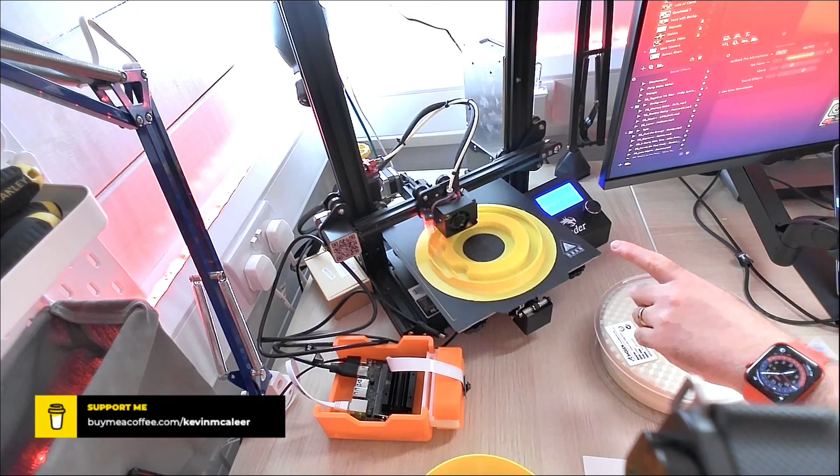I've actually started printing that one first, and I've bought myself a second 3D printer. It's another Ender Pro, this is version 2 of the Ender 3 Pro. So the one I have to my left here - this one is the original Ender 3 Pro, and that's printing out my Pac-Man as we speak. And the one over here, this one is the new one. I'm in the middle of constructing it.

Okay, so what else is there to say? Yeah, so we want to make it easily 3D printable. This is one of the reasons why I've sliced this into 4 different chunks. I just wanted to make this a bit more easy to print, otherwise it would take practically a week to build and probably be solid full of build material. So this is kind of what I'm shooting for here. So yes, game board, amazing.

So I'm thinking about having a printable maze layout that you can put on the floor and have the robots follow a line within that path. So I'm thinking that we'll have a black solid line that they can sort of trace along. I've got a couple of line following modules here. Let me see if I can find the one from the original SMARS. I think that is just that.

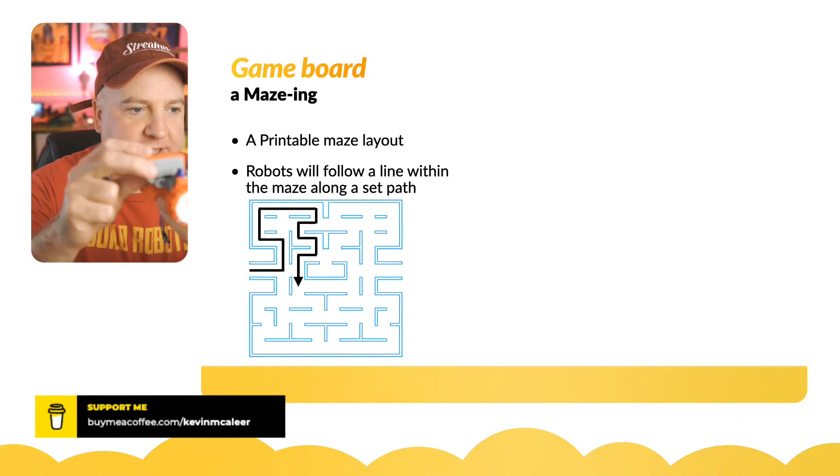So I've got a SMARS robot here which has the original line follow module on it, which is just hidden inside this little compartment here. So if I just slide this out, you can see there. Let's go full screen for a second. That is the original SMARS module for line following. I've got a slightly different, slightly smaller module which does the exact same thing, and this is the one I've used on the ghost model we're going to look at in a second, just because I had that to hand.

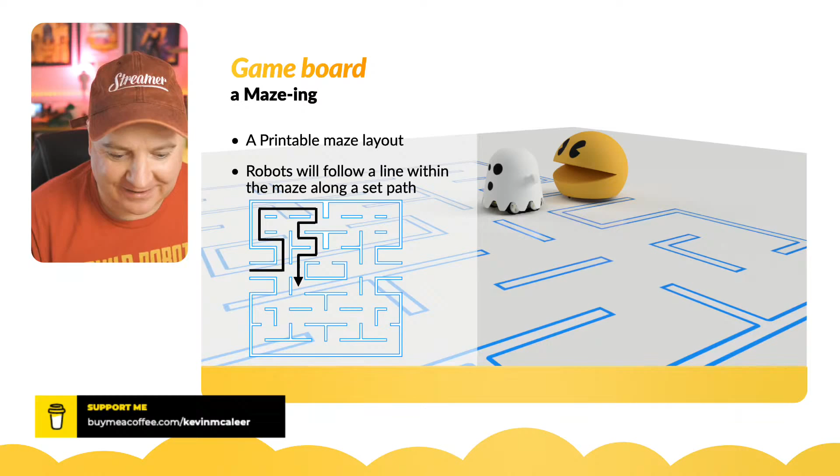Okay, and yes, what we're going for is that kind of scene where we've got the Pac-Man chasing the ghost. They're going to be following a black line along a path and it'll be inside a maze, and we'll look at the code in a different episode.

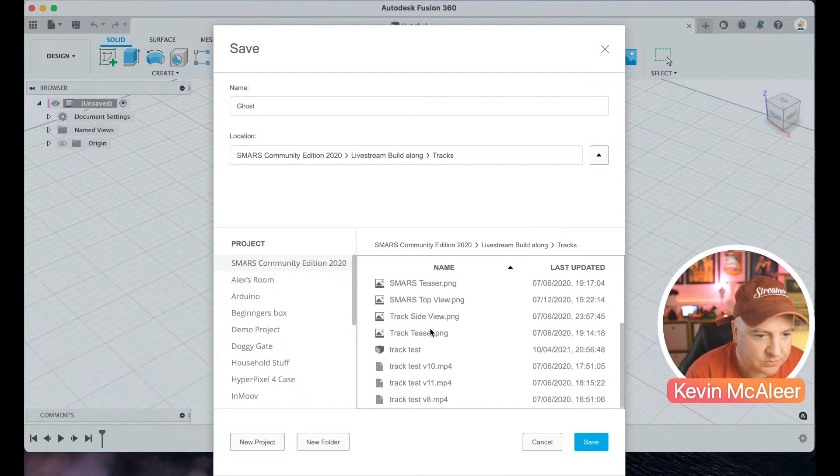Right, so I've got Fusion 360 open there, and the first thing that we need to do is save the file. So let's just go to Save. Let's call this one Ghost. And let me just back up a little bit. I'm going to go, yeah, live stream build along is good. Do I need to use that button there? I just want to save it in a different folder. So there we go. That'll do fine. Call it Ghost. Okay.

And what we're going to do now, I talked about having the Fusion 360 file for SMARS, that means that we can go into our data panel, which is this, when you press that little nine squares thing there, and we can do right click and insert into current design. So I'm going to insert the SMARS robot into our current design, and I'm going to use that to build our ghost around. As soon as I've done that, wait for it to plop there, we can close the data panel now. Okay, and I'm just going to save it again.

Okay. You might see it jump in and out a little bit. I think that's just the software I'm using to do screen capture. It tries to capture everything, and sometimes it zooms in and out a little bit, which is a little bit irritating, but there we go.

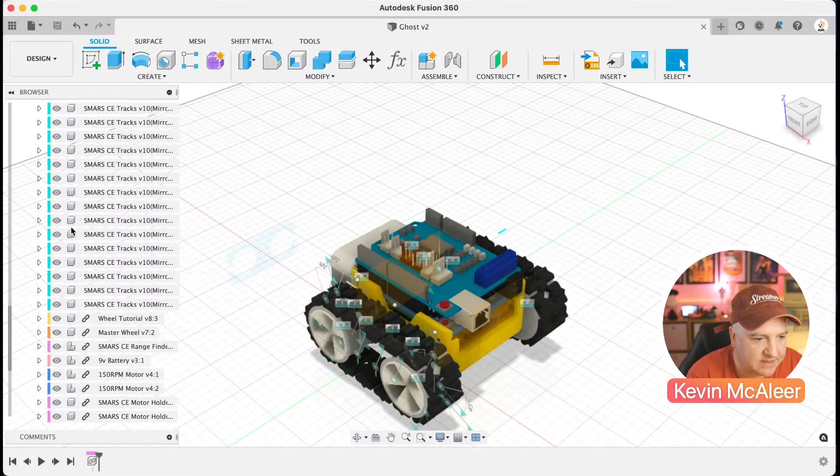So we can now see we've got SMARS track test. What I'm going to do in there as well is switch off the rangefinder, because we're not going to be using that in this particular model, and I want to make sure that we don't accidentally include that. So I think there is rangefinder. If I just switch that off, there we go. And we can spin that around and have a little look. There's our SMARS robot.

Okay, so the first thing we want to do then is create a new sketch. So let's go to create a new sketch, and we want to create it on the top plane. So let's go to... Now I've noticed this. I was wondering if this would happen. It might happen several times while I'm using Fusion. On a Mac, for some reason, when I just move my mouse around, it's kind of got stuck into this pivot mode, which is really irritating, and I don't think you can do anything to switch it off. So what I found you have to do is simply close the file and then reopen it. If I just close that and reopen it, everything should be fine.

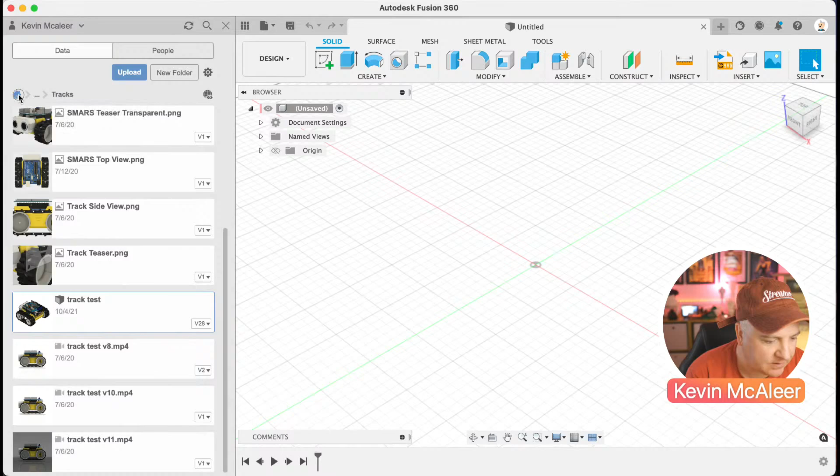So let's just go back to recent data and Ghost. There we go. Might have to do that a few times. It's a bit irritating. I believe it's a known bug in Fusion. I don't know why they haven't prioritized that as a fix, but it's a bit annoying that happens. Okay, so let's just close that out again. So this time we're going to create that new sketch. We're going to create it on the top plane, looking from above, and then I'm just going to click there. Here we go.

Okay, so I want it to be centered in the middle of this SMARS robot. So what I'll need to do is just find, is there a central point there? And if there isn't, we can just project in. So if I do P for project and just grab a couple of these lines, we can figure out where the middle is. So let's just do that. I didn't build this around the origin, which is a bit annoying.

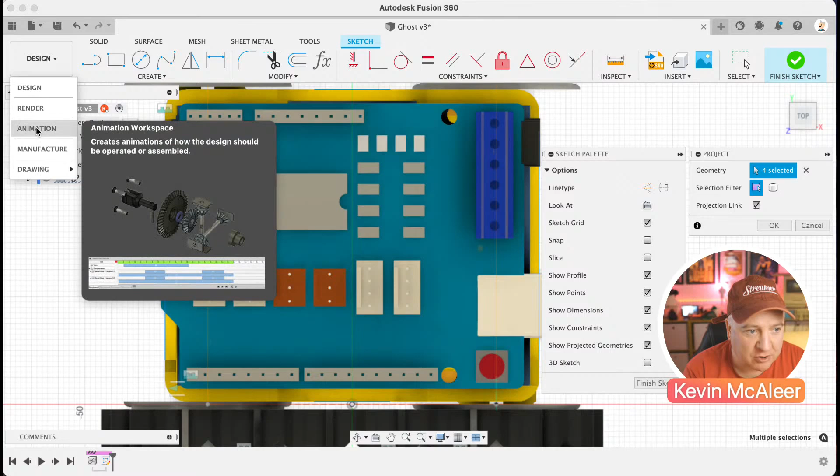So Hypotics is asking, am I using the full or limited version of Fusion 360? So I do have the full paid version. So thanks to people supporting the show, I was able to get a full licensed copy of this. And that just means when I go to the design, I've got all the render options, all the manufacture and animation and so on, and drawings and whatnot. It's not that limited if you get the hobbyist version. I think you just can't do cloud-based rendering.

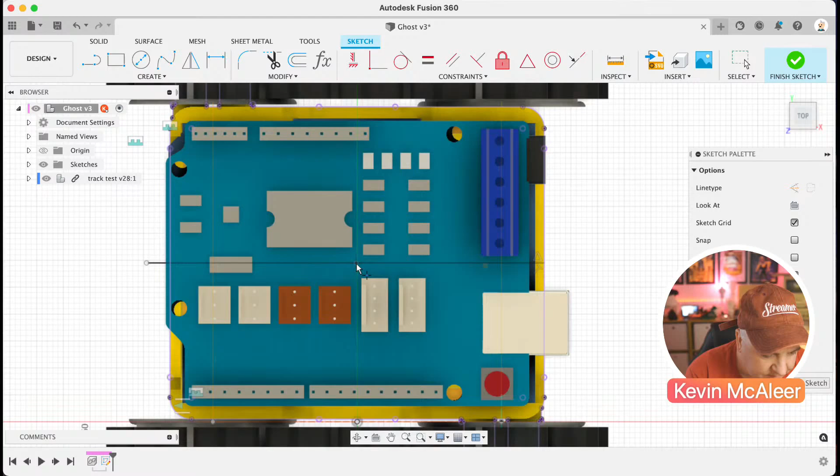So that's all. Right, so I've got some projected in geometry there. Is that going to be enough? Maybe I'll just project in the body. That might be just easier. Just project in that thing there. Okay. And what I want to do is just find the center point. So if I just grab a line down here, grab that across, that'll do. And that little point in the middle there, that's what I'm going for. Let's just create a point there and put it there. That'll do.

Right. So I'm going to use that center point there. I'm going to click in it and draw C for circle. And when I drag out, we can see that we've got a circle now. And the idea is that this is just surrounding all of our robot, so that, like on the one I've built here, there is nothing touching the edges. And what I found is the diameter that's ideal for that. If I just click there and do D for diameter, and just give this a diameter of 145, that's pretty good. We're not making it absolutely massive, but we've got a bit of clearance around the tracks.

Yeah, Dale also says you get 10 documents with a limited version. I think there's also a limit on how many sub-assemblies you can have in one model. I didn't know about the sub-assemblies. That must be a new limitation. They did make it so that you had 10 active documents, and you had to go into the data panel and say which of the 10 you're currently using. It's a little bit limited, but it's free, so it's as good as it's going to get for free, I think.

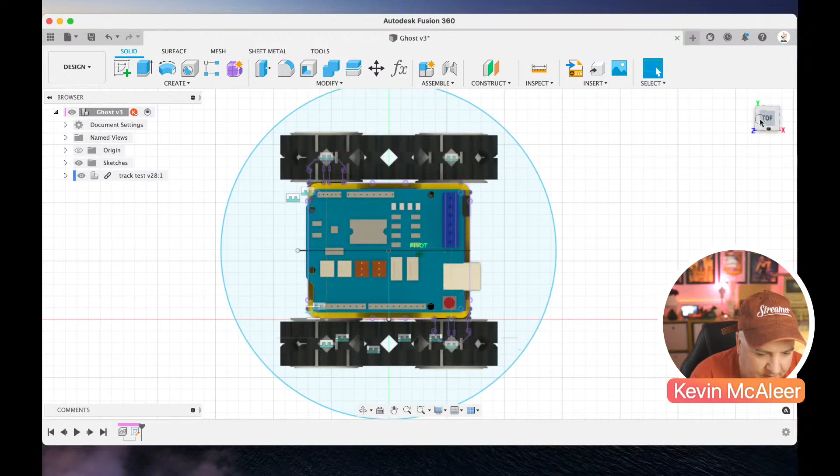Okay, so now we've got that locked in there. I'm also just going to, from the origin point, do a line up there, and then whatever dimension it is. That's going to get irritating, that flickering. Let me just see if I can switch that to a different mode. I've currently got it set to zoom to the app window. If I do that, it'll stop the flickering, because I think that's going to get really irritating. Right, that's better. So if I now do D again, dimension, just dimension out that line. There we go. That should lock that in place. Finish that sketch.

And now we're going to extrude up that shape. So I'm just going to hit Q to extrude. And we're going to extrude this up as a cylinder by 130. I'm just going to zoom out a little bit so you can see that, just to make sure we've got everything included. We want to make sure it's a solid. So it needs to be 130. Why is it not included? All of the profile. There we go. What we can do is switch off that for a second and make sure we've got all the bits of profile selected. So yeah, 130.

And then the other thing we want to do, where you've got this taper angle, let me just bring this out so you can see it, taper angle, we're going to set that to -10. So it'll look like a plant pot shape. That's kind of what we're going for. Okay, so what we're going to do next is fillet that top edge. So this top edge here, if I just select that and use the fillet command, which is this round thing here, we're going to fillet it by 50, and that gives us a nice kind of rounded effect.

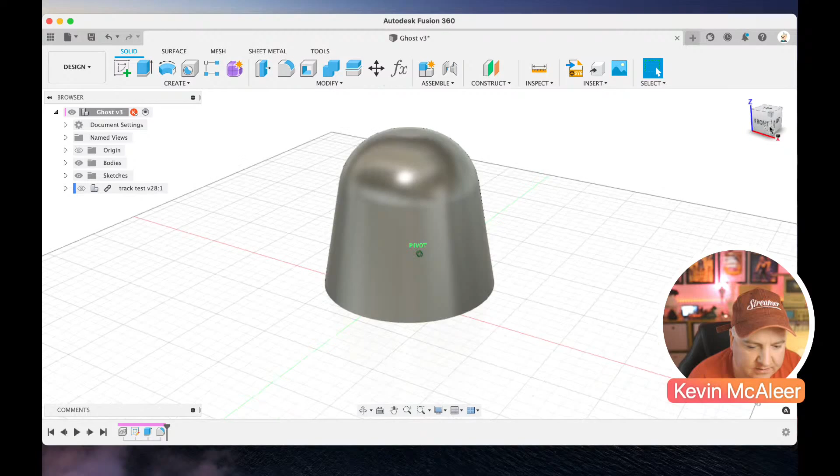And then we're going to flip this over now just by grabbing this and moving that up there so we can see underneath. And I'm now going to use the shell command, which is this one here. And what shell does is it kind of makes it, let's just do 1.5, kind of opens it out so that it's empty inside, so now it really does look like a plant pot. So I've done 1.5 millimeters, that seems to be okay.

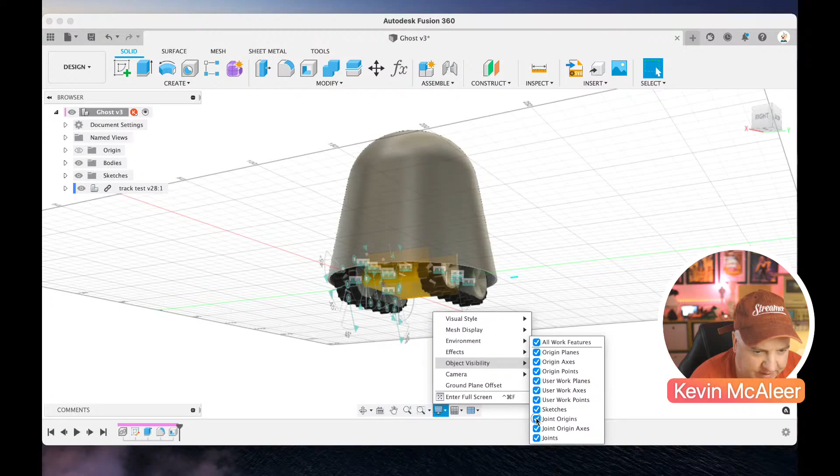And that means now if I switch that track test back on our SMARS robot, we should be able to see that's now sort of sat within it. So there we go. What I also like to do on here when I'm working, I don't always need to see all of the object visibility, so those joint origins, I'm going to switch them off, and that just gets rid of a bit of the visual noise that's on that particular model there. Okay, we can switch off the track test again now, just for speed.

Okay, so that's that. Next we are going to, on the very bottom plane, let's go back to our first sketch again. And what we're going to do this time is we're going to draw a rectangle round that. So let's just draw a big rectangle. So I hit R for rectangle, and then what I'm going to do is I'm going to use the tangent command to connect that line to the circle, so that this encompasses the entire circle. Alright, I need to fix that up in a second.

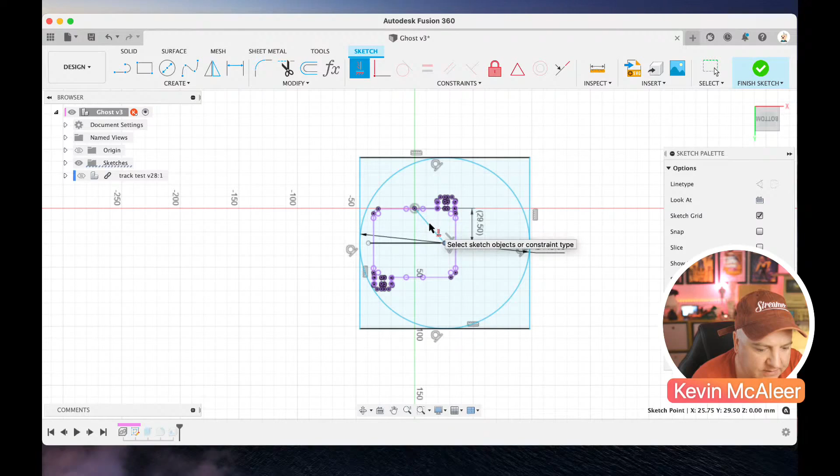And that to there. So I noticed that that circle moved about a bit then, and that's because this line that we've got here needs to be sort of locked into place. So what you can use is this horizontal vertical constraint. So if I click on that and just click on that line, that should lock that into place. Let's just make sure we've got that selected and hit that here. There we go, it's all turned black, that means it's now locked into place. And let's just switch on our track.

Yep, that's all good. So the reason I'm doing this rectangular shape is I want to create some planes that we can use to draw other things. So before we do that, let's just switch on our sketch that we've just created, sketch number 1, and we're going to pull by pressing Q, select those 4 bits, and we're just going to extrude this up. Doesn't really matter how high, to be honest. And it doesn't matter that we've missed out a middle bit, so that's okay. What we really want is these nice flat surfaces.

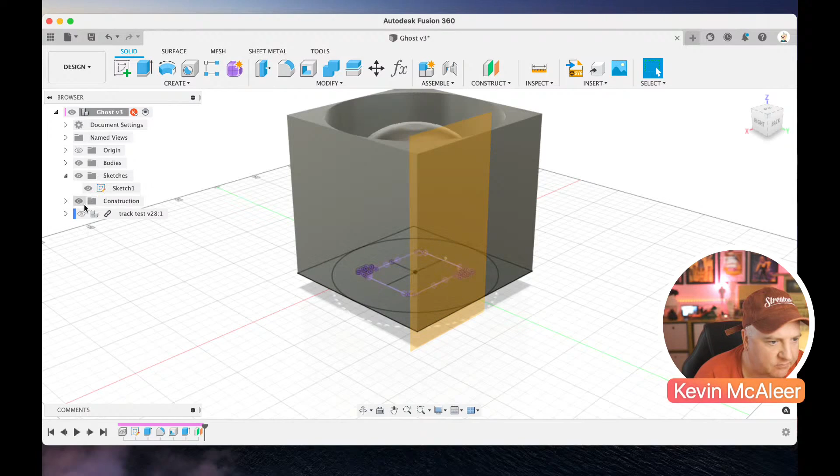Okay, so let me have a look what's next. So yes, what we want to do is we want to now create an offset plane, and we want to use this side here to create the first offset plane. And this is going to be our right side, is it? No, that's the back, isn't it? Let's see which way around our robot's facing. So what I do is I look to see where the USB connector is on the robot. So let's just switch off those bodies for a second. So this is the right hand side of the robot.

So what I'm going to do in the body section is I'm going to name the construction plane there, just so that I know what I'm working with. So let's just click on that and call it right. And then on the opposite side of that, I'm going to create another offset plane. So on this side, I'm going to create another one. So construct offset plane. Okay. That's going to be my left plane.

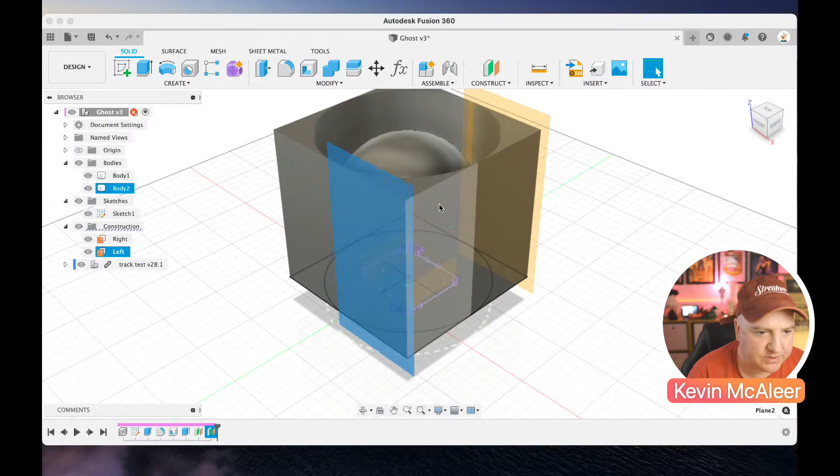And what we're also going to do is the front and the back. So I'm going to click on that one there. That is, if I remember correctly, that is the back. So let's do offset plane. Okay. I'm going to name that one back. Back. And then we're going to, oops. I mean, it doesn't really matter, I've spelled that wrong. And then we're just going to flip that round to the other side. And we're going to create one on here and just call that front. Offset plane and front.

Okay. Great. Now what we want to do is create some mid-planes. This is really what I've created those for. So between the right and the left, I want to create a new plane. So what we do is we create a mid-plane by going to Construct and Mid-Plane. And then we select the two planes that we're interested in.

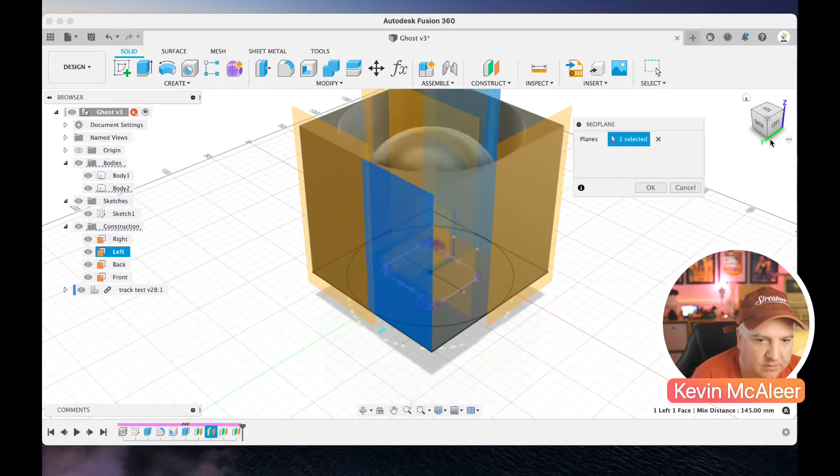So if we just select the left and the right, let's just make sure we've got that correct. You can see now there is a new plane that's just been created just here in the middle. So let's click OK to that. And I'm going to call that one the center plane. I'm going to switch off all those other ones, the left and the right for now.

And then I'm going to do the same again between the front and the back. Okay, so let's just go to Construct, another mid plane, and we're just going to select the back and the front. Okay. And that gives us our, does that look right? Looks like that's at an angle. Let me just try that one again, edit. I'll just unselect them. Let's do that again. I think I selected the wrong ones there. So front and back. There we go.

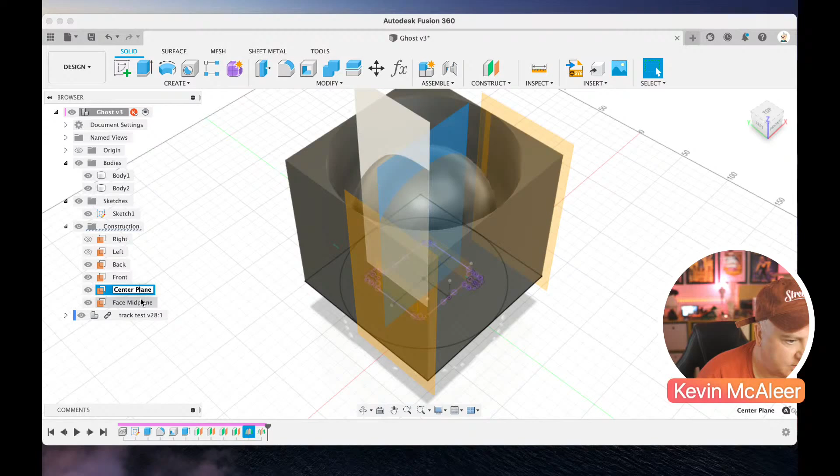That's the mid plane. So we're going to call this one the face plane. So let's just click in there. Call it face mid plane. Okay, we can switch off those other ones now. Right, so we've kind of got like a crosshair now right in the middle of our robot. We can unselect that body shape now. We don't need that anymore. And let's have a look what's next.

Right, so what we want to do now is we want to face our robot. So I think on this one, is it the left hand side is the front. Let's just hide our body for a second and see. Yep, that's the front of the robot. Okay. So Adam's asking, will these fit on top of SMARS? Yes, that's exactly what we're going for. We're going for this kind of design where it will slot into place over our SMARS.

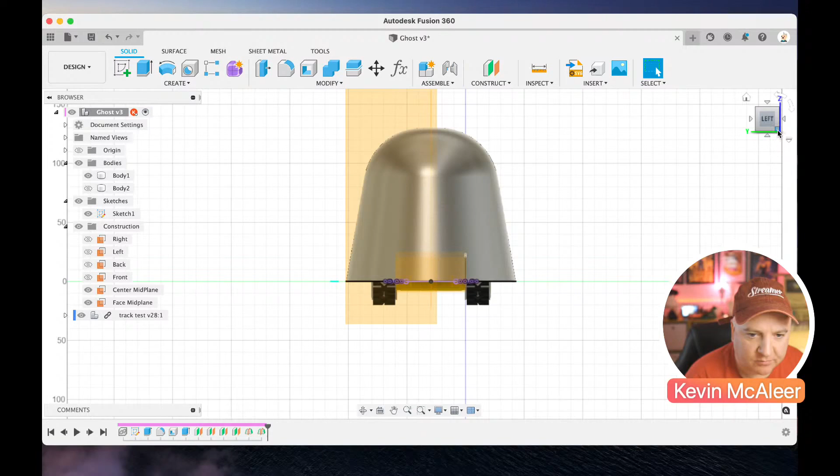So what we've done, if I just flip to the bottom of the robot, you can see there we've got our SMARS underneath, and this entirely surrounds the SMARS robot. Okay, so let's get back to, that's the back, so we want the front, which is, on this particular one, the left view. Okay. So I'm going to zoom in a little bit, and I'm going to create a new sketch on that face mid-plane. So that's as we're looking at it. So this is going to be the hand of the robot.

So let's just sketch out, let's just do it here. So I literally just do L for line, and I also use the slice command. So let me just move this little sketch palette here. You've got this slice command. What that will do is it will just let you work on the actual plane rather than working in the middle of it. You can't really see what you're doing. So if I do slice, it kind of slices the sectional view or what we're after.

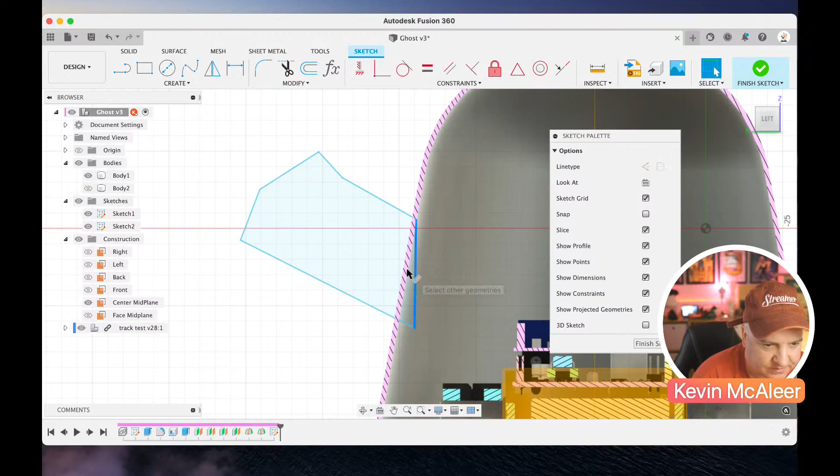Right, so I've got my line, and I'm just going to very quickly just sketch out from the side of the robot a kind of hand shape. So let's go for that. Let's go for, I don't know, that. And that. Okay. And what I can also do, if I really want to, I can make these things parallel with the body if I wanted to. It doesn't really matter because we can intersect it and then throw the bits away that we don't need, so it doesn't matter too much.

What I'm also going to do, just looking at my reference model there, I like to use this fillet command just to round out these corners. So I think all my corners are 10. So if I do that one there as 10, I'm going to do the next one. Let's move that up a bit there. Yeah, let's do that. Make that one 10. So select both of them, type in the number, and that's actually going to be underneath a little bit, like so.

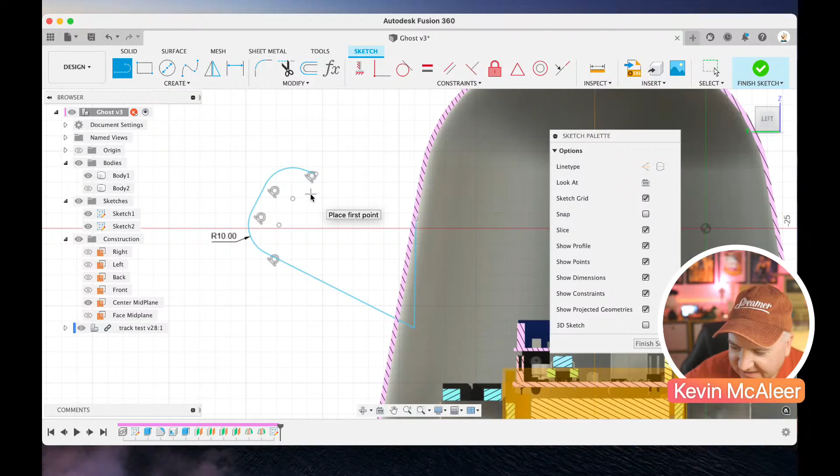That's gone a bit funky there, hasn't it? Let's just undo that. Yeah, that's weird. Let me just get rid of that line for a second and that line and redraw them in. Right, I can see what's happening there. It's got an extra line that we didn't need. Okay. I mean, it doesn't have to be like a massive work of art, this thing. It's literally just the hand shape. And I didn't draw this parametrically. I just kind of drew it freehand and then captured the coordinates of what I drew.

So I'm just going to do that and then line that up with there. So I think that fillet between that line there and there is something like 7. If I do D for dimension, I can just click on that, I think. Let's just zoom in a bit more. Do you know, I knew this would happen.

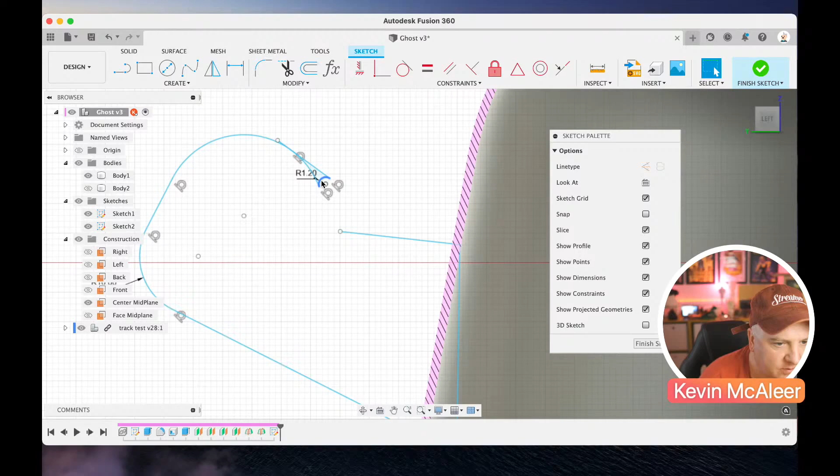Let's just go for space. Let's get rid of that. There's a weird thing going on just there that I don't want. Get rid of that, delete. Right, let's just try that again.

So I really just want that to go there. That'll do. So let's just do another fillet between that and make that 10. That's better. And then between that and there, let's just make that one 7.5.

So I've done that, and that'll do for now. Doesn't have to be amazing. Okay, we just need to make sure it's within the body itself like that, and that it looks proportionally about the right kind of size. Looks a bit big, that. Might bring that in a bit.

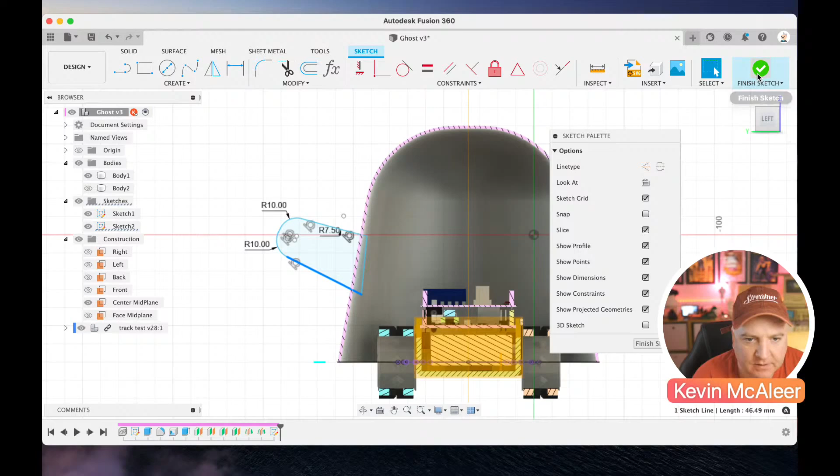Let's just move that up a bit. Move that in a bit there as well. That'll do, that'll do. Okay, let's not overthink this. So what I'm going to do now then, I'm just going to have a look at this in 3D space.

So let's just move that around there. And what I'm going to do, I'm going to extrude that by pressing Q, clicking on that, and I'm going to drag this out by 10 millimeters. I'm also going to set this to be 2 sides or symmetric, like so. That'll do. And we don't want it to be cut, we want this to be join. So let's do that, join.

We can turn off the other sketch as well, just so we can see what we're doing. We can also turn off those construction lines for now, and let's turn off the tracks as well. There we go. Right, so that's looking a bit blocky.

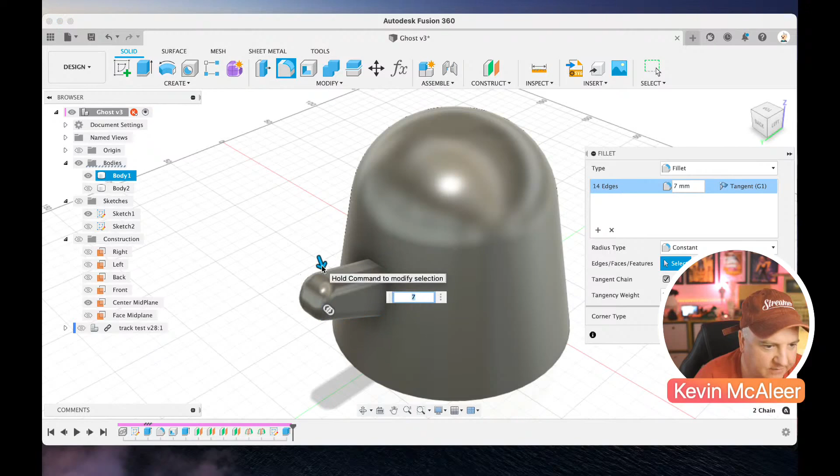So what we want to do is just give that a bit of a fillet. So again, we can just select that face. Let's just do the fillet command. Select that, do 7 millimeters. And if I also just hold down the command key, I can select the other one as well. And we get kind of a nice rounded arm shape there.

Like so. Okay, so we want 2 arms. Oh, before we do that, we actually just want to fillet the armpit as well, so where that's going in, it's looking like a teapot at the moment. We just hit that fillet command again and then just select that edge there. We can do that by 5 millimeters. It just gives it a bit more shape to it.

Okay, I also like to work when I'm working - that looks a bit reflective to me. If I hit the A key, I can bring up the appearance panel and I can search in this little library thing for white plastic. So white matte plastic, and just drag that onto there. There we go, I think that just looks a bit more visually appealing. Oops, where's it gone? There we go.

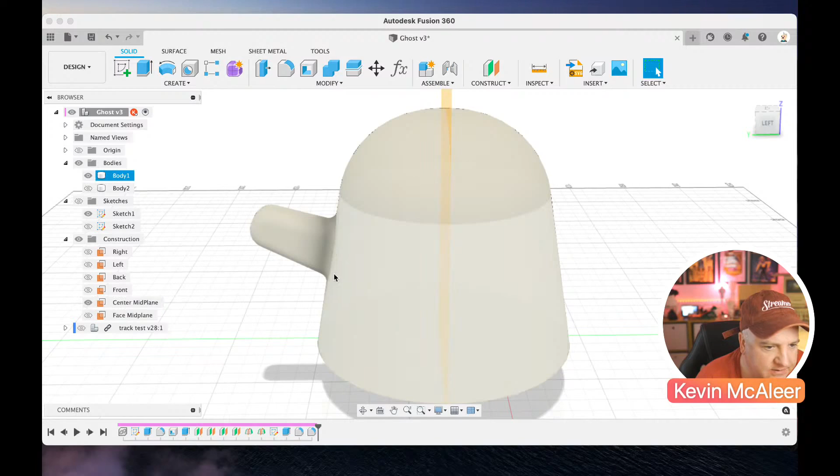Click close. Okay, so what we want to do now is mirror that hand across. So let's just turn on our construction lines again, and yes, it's that center line, center midplane that we're after. We're going to go to create and mirror, and then instead of it being faces, we're going to select features. And in our timeline down here, we can select the extrusion and both of those fillets, and then the mirror plane, we just move this around a little bit - is that center midplane that we created. And then okay, and there we go, we've got 2 arms now.

We can turn off that construction line to have a look at our ghost so far. Coming along, isn't it?

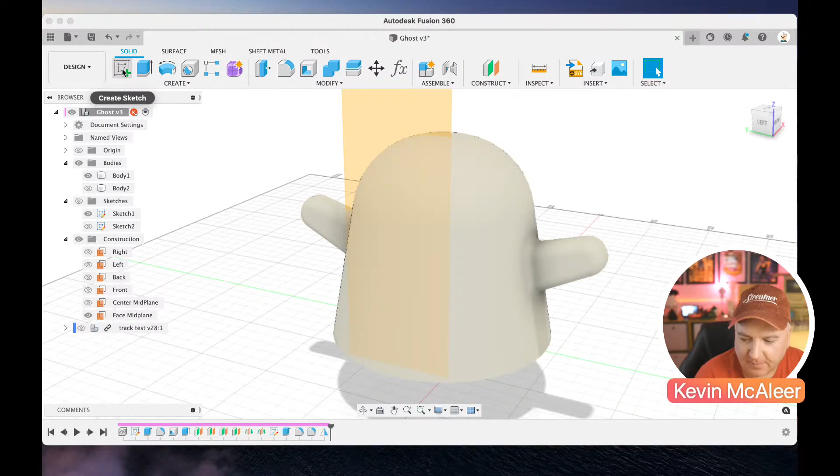So one of the fun bits is now to draw the face. So let's now turn on our face mid-plane, turn off that center one, and we're going to create a new sketch on here. Actually, let's not use the mid-plane, let's use the front plane. And let's create it on there.

So let's create... I'm just going to hit C for circle, and I'm just going to draw out two shapes. And I'm going to draw another one for the mouth. And I'm just going to draw a line between both of these, like so. Lock them into place. Press space to select.

Did I draw an extra line? I think I did. Space to select, then I'll hit the X key. You can actually just press this button to make it a construction line, which means when you're selecting the profile later on, it ignores this and only looks at solid lines.

So what I want to do is make that line horizontal, so click on that horizontal constraint. I want both of them to be the same, so I'll select one and make it 25 millimeters, and if I click on equals, I can click on that edge and make it exactly the same.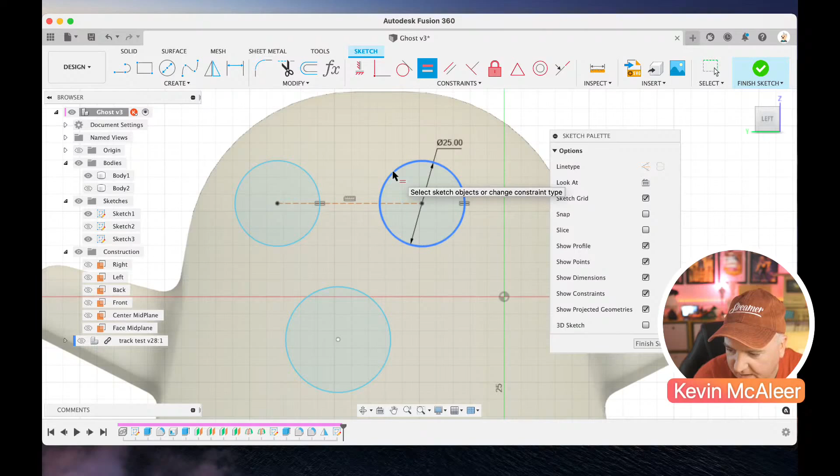And the distance between both of them is actually 25.5, so if I just make this 25.5, that doesn't quite look right. Why is that? Oh right, that's because it's not that one. Let me just undo that for a second.

I'm going to create two vertical lines. Doesn't matter where they are just yet, as long as they are vertical. I'll just double check by clicking on that. I'm going to make both of them X construction lines.

Now what I'm going to do with those two is make them tangent to that eye. So I'll click on that eye and that line. Oops, let's try that again. That is going to be tangent to that line, and that's going to be tangent to that line.

Then I'm going to do another circle, and this circle is going to be 15.5. I'll just draw it anywhere to begin with. We actually need two of them - this is kind of like the inner eye shape, so let's draw one of them. D for dimension, 15.5, and we'll make the other one equal to that.

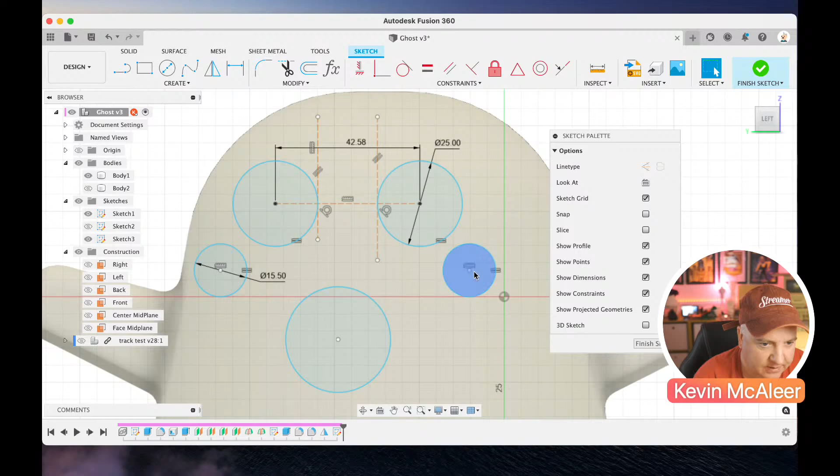If we want both of these to be horizontal, you can just click on horizontal and click on both the origin points, and they will now be in line with each other. So it doesn't constrain where they are, but they'll always be horizontal to each other.

I'm just going to select that onto that line there, so it's now within the eye, similar to that one. Then I want to make these so that they are tangent to that other line just there, and that one tangent to that line there.

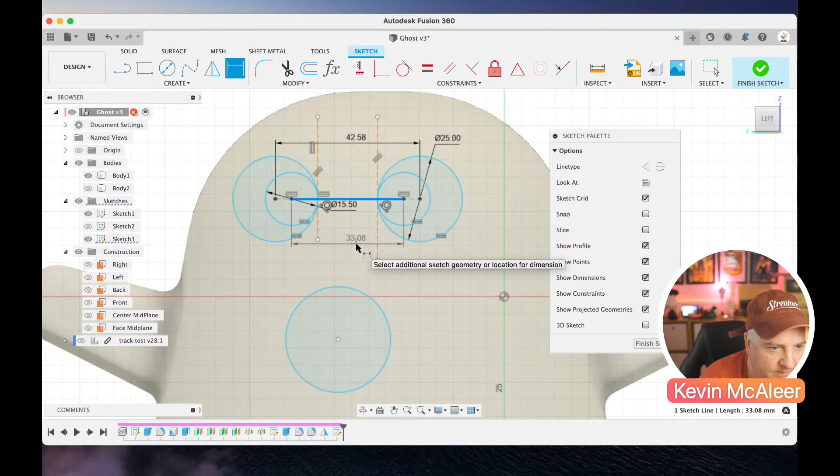Now what I can do is draw a line between that point and that point. Do D for dimension, and that's the one that needs to be 25.5. Why is it complaining about that? Alright, it's complaining because I've got a dimension up there that I just need to remove.

Let's just do that again for the smaller one. So I've got two lines here. When I try and click on that, it's going to select the wrong one. So if I click and hold, I can actually select which of the profiles I'm after - so it's actually that top one there, and that's the one that needs to be 25.5.

Now we're cooking with gas. Okay, so the other thing I'm going to do is find the exact center line of this ghost body. So if I do P for project, I make sure my selection is on bodies, and I can just hit that ghost body there.

I've now got the outline of that body, and I just want to do a line at the very middle. You can see there when I move this X across, it appears like a triangle - that means that's the midpoint. So I'm just going to draw this down like so. I'm going to select that line and make it X for a construction line.

What I can do now, an easy way to make sure this line is centered, is to do another line from the midpoint of that line to the top there. Make that a construction line, then click on horizontal vertical, and that snaps it into place in the middle. And if you don't like these projections, you can actually turn them off.

You can also turn off the profile as well if you want. If you turn off the bodies, it'll get rid of the ghost altogether, and you can just concentrate on the shape that you're working on.

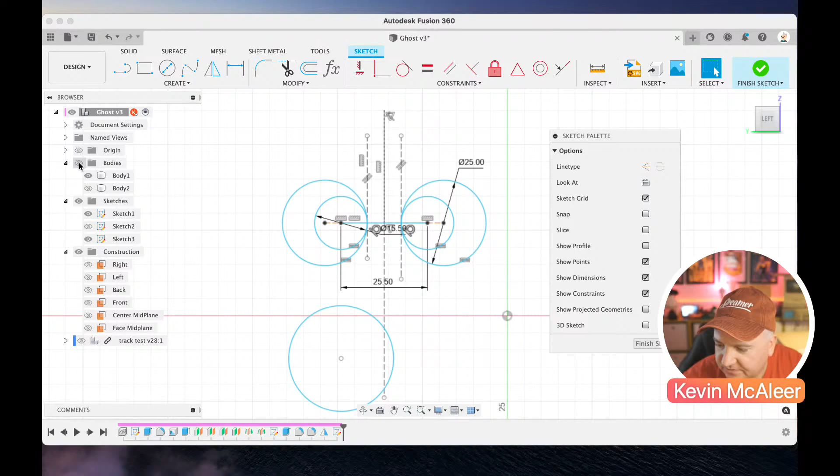Okay, so we're nearly done now with the face. We'll just have a look if there's anything else we need to do. My instructions have disappeared for a second. Right, so the mouth is 20, so if I just do D for dimension, make this 20.

And I'm going to draw a line from, let's have a look, from this point here - I'm just going to do this over here somewhere for a second. I'm going to make that D for dimension, 19.

I'm going to make that a construction line, and also make it vertical. Then I'm going to draw another line from there to the center of here, and give that a dimension of 20.

I'm also going to make that a construction line. Then I want an angle, so I'll do D for dimension between that line and the center line, like so. We've got an angle, and the angle is just going to be 6 degrees. There we go, that is my ghost face, and that's what I'm sticking with.

I'll also make that line there where my origin point is, and just connect those two up. Just make that a horizontal line. There we go. Everything's turned black, that means it's locked into place, and we can finish that sketch.

Let's turn our sketches back on, let's turn our ghost body back on. Now at the moment that sketch is kind of floating in space in front of our ghost body, and we're going to project that through. We're not going to do it just yet, so that's just going to stay there. Now at the bottom of our ghost we want that kind of wavy skirt effect.

So what we're going to do is a similar thing we've just done here. In fact, we could just use that same sketch to save creating another profile, and then at the bottom down here we can see, I think that's the center line. Let's just draw that up.

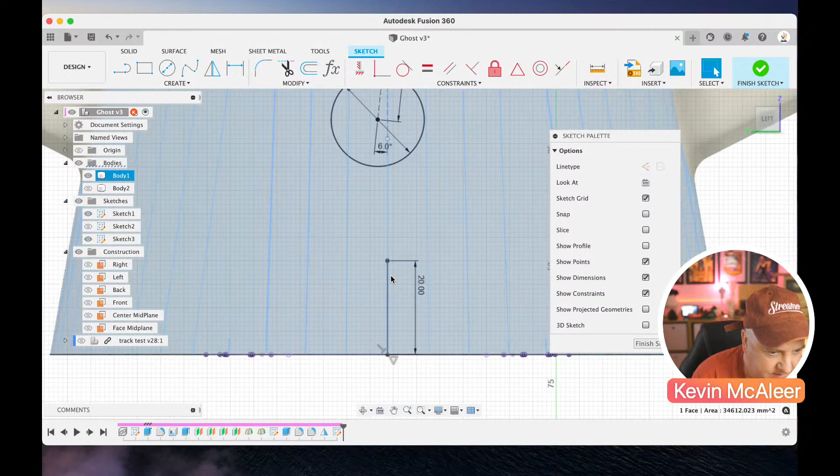Do D for dimension, I'm going to make that 20, and make it a construction line. I'm going to hide that body just for a second so we don't get confused, and also make sure that is definitely vertical. There we go.

Okay, so the way that this shape works, let's just go for line. I'm just going to sketch this out and then constrain everything. So there's kind of a line like that, a line that goes down to the base, and then a line that kind of goes out. Let's just end that line.

And then we need the same on the other side, so it kind of goes down and then across a bit. There we go. So let's just hide the other sketch there.

Right, so I do need to just do another line from there to there, and another one from there to there. Okay, let's just make that one nice and horizontal. Right, let's constrain some of these things.

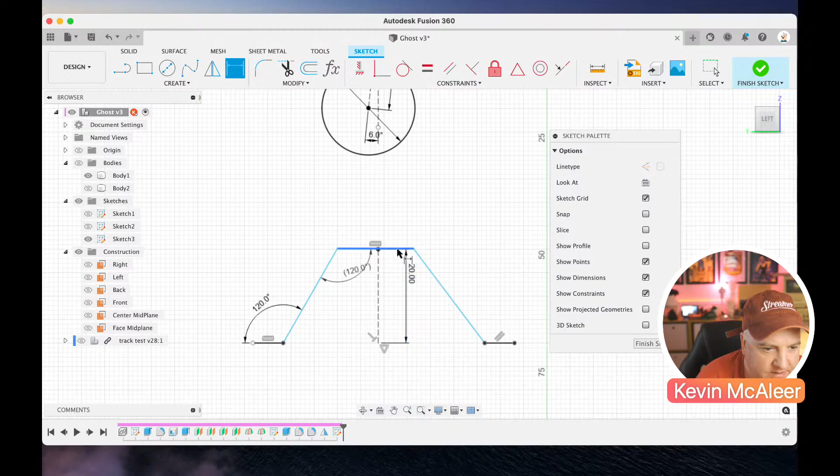So the angle between this and this needs to be 120. The angle between that and that needs to be 120, which it already is. That and that also needs to be 120, and you've guessed it, that and that needs to be 120, which it already is. Then we're going to add some nice fillets to these corners, and the fillet is going to be 5.

That is going to be filleted as well - oops, sorry, I just did the wrong one there. Let's escape out of that. Let's do that and that. That's going to be 5.

We are then going to do this to the bottom one. That's going to be 5. And then that last one over there is also going to be 5. Okay.

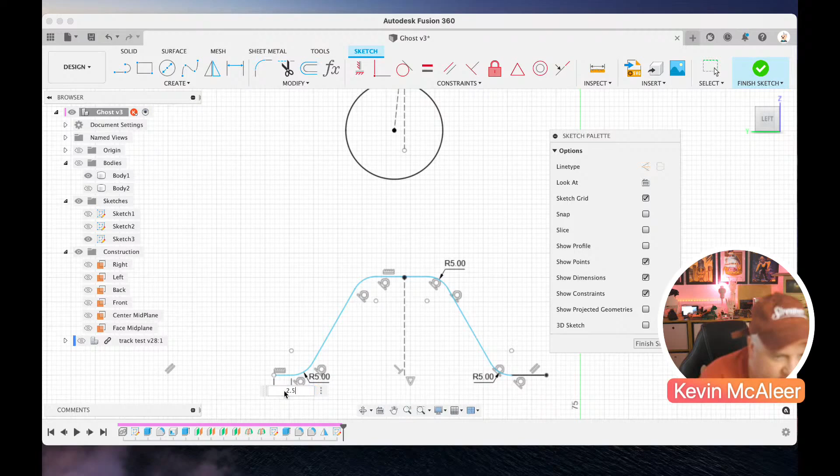So this last little piece here, that needs to be - oops - that there, D for dimension needs to be 2.5. That needs to be 2.5. And then this line here needs to be 2.5. And we want that to be where the sort of top of that lollipop is there.

We want it to be dead center, so we use that midpoint. We can click on that line and select that point, and that's now the midpoint. Now at the moment this one is not the right length, so we can just make those two collinear.

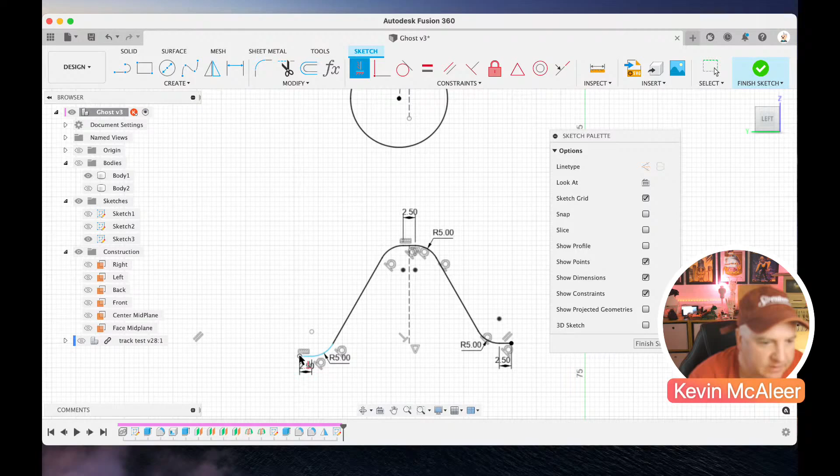Let's try that. So if I do that point, it needs to be collinear with that point. If that doesn't work, we can just use the horizontal vertical constraint for that point, that point. There we go, that's turned black, that means everything's good.

And I'm just going to draw a line between that point and that point there, just so that it's got a nice profile to it. So if we select show profile, we can see now that that's got a profile to it. Great.

Okay, we're going to extrude that skirt into the body now. So let's just select our body. We're going to select that profile. I'm going to press Q for push pull, and we're just going to do 30. It's going to be minus 30. So extrude into the body, and it's going to cut it out like so. And that's great. That looks really nice.

Now the thing is, we want that to be a circular pattern all the way round. So to do a circular pattern, we first need to have an axis of which to rotate around. So if I just go here, I can go to construct. I can do axis through a cylinder or torus. If I just select this bottom section here, we've now got this nice axis all the way through, which is what we need.

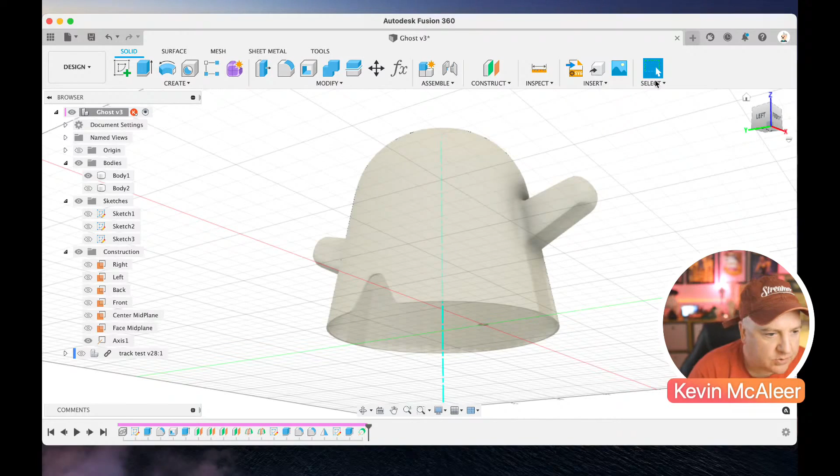And we can now do that circular pattern. So if we go to create and pattern and circular, we can select features. We can select that feature that we just cut out there. We can select the axis we're after, which is that new axis, and we can select 10. So if we just increase that 9, 10, click OK, it's now going to cut out that little skirt shape for us. There we go.

Okay. So now we're not going to do the eyes just yet. There's a reason for that. We are now going to load back our SMARS robot. We're going to create a new plane, a new sketch based on part of this. So let's just hide our ghost body for a second.

Let's zoom in to the very front of our SMARS robot, and this area just here, this is where our rangefinder normally sits into place, and we want to use that to create a new kind of section that will enable us to connect our SMARS robot to the body. So we just need to make that shape.

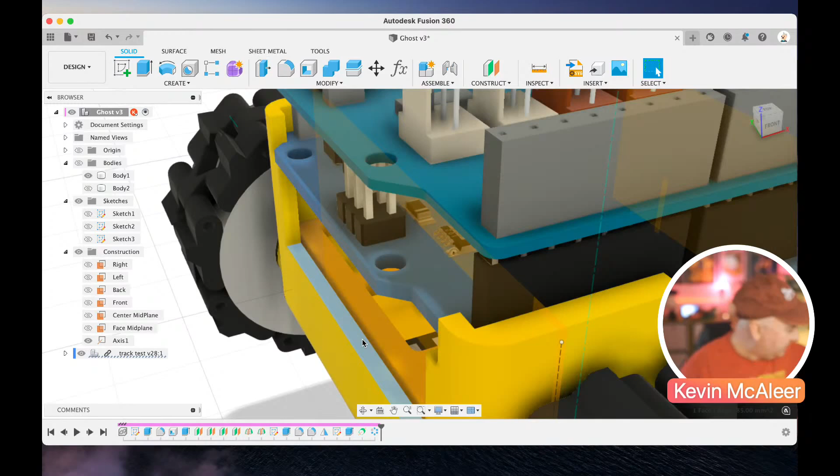So what we will do, we can now just do a create sketch using that plane. If we do slice, it will slice into the SMARS robot. You get this very funky looking crosshatch pattern. And then if we do P for project, we can actually project in. We actually this time want specified entities because we want the front and the inside edge. And what we also want to find is that edge there and that edge just there.

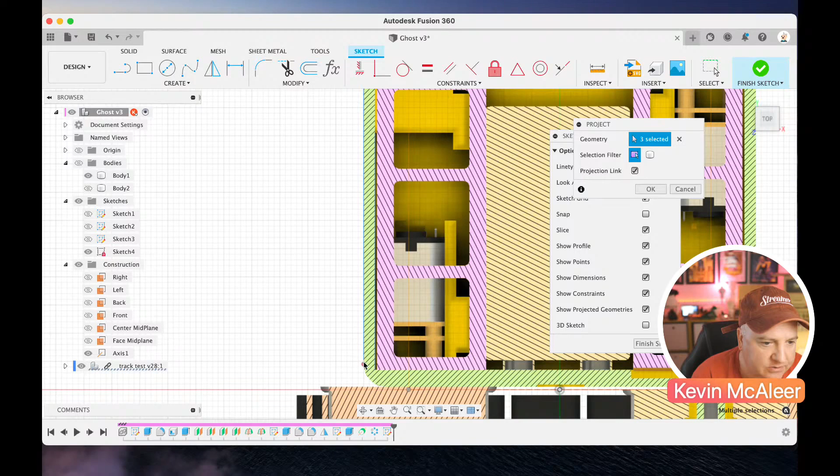Okay, that'll do. We can now actually turn off that track, and we can see that we've got a couple of edges. Okay, so let me just turn that on for a second. Sometimes I find it is a little bit easier, rather than just working completely in 2D, just to go to 3D and make sure we've got the right things we need, because that doesn't look right to me. It's that inner edge bit there we need.

Do P for project and then just select that. And equally, we want that point just there. Perfect. Okay, we can now go back to the top view. We can now turn off our SMARS. And hopefully that's enough information for us to create what we need to create.

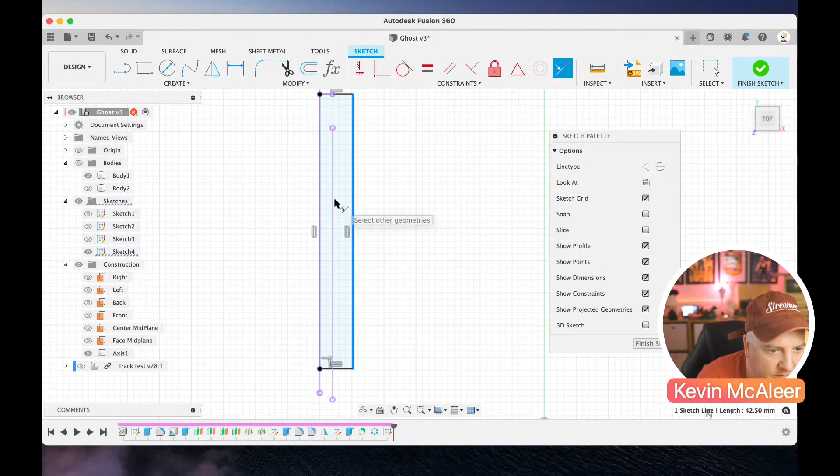Right, so we need a rectangle. I'm going to type to that point there and then down to here. Let's just have that aligned to there. And the width of it, if I use that collinear, I can make that line collinear to that line there. It should be about 3 millimeters. So if we click on that line there, it says 2 millimeters down there, that's fine.

And what we need to do next is just draw two other rectangles either side of that. We can just do it outside and then we can then constrain them. So let's just make both of these edges collinear. And both of the bottom ones collinear, like so. And then we need that edge to be collinear to that one, and that edge to be collinear to that one. And then the width of these needs to be 4.

Is it 4 or is it 3? Let's try 3. Oops, not 3 meters. Let's undo that. Let me just double check on the instructions. I think it's 3. Oh no, it is 4. It is 4. That's right. And then let's just make that one equal to it. That is equal to that.

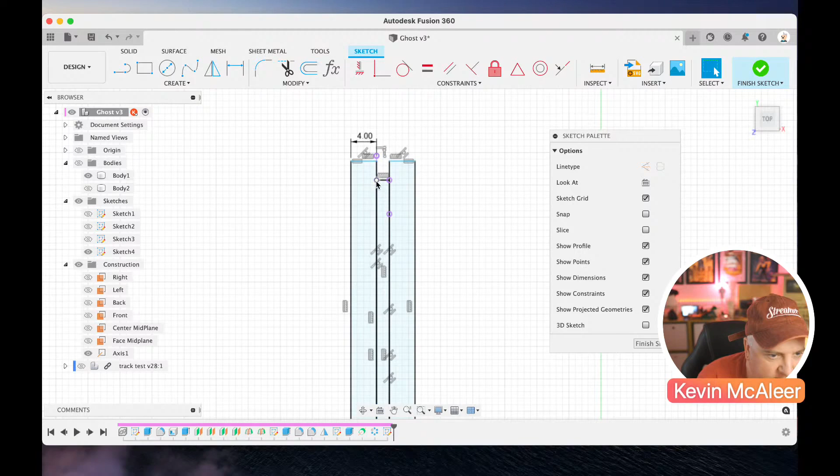And then the height between this and here needs to be 3. So D for dimension between that point and that point. And that needs to be 3 millimeters. It wasn't far off, was it? And then equally down here, we just need that to overshoot between that point and that point. Let's just zoom in on that a little bit more.

I'm just going to switch our SMARS back on for a second to make sure. Yeah, that's fine, so it doesn't really matter which of those we use. We'll just use the bottom one, so between that point and that point. That needs to be 4. Let's turn off our SMARS again.

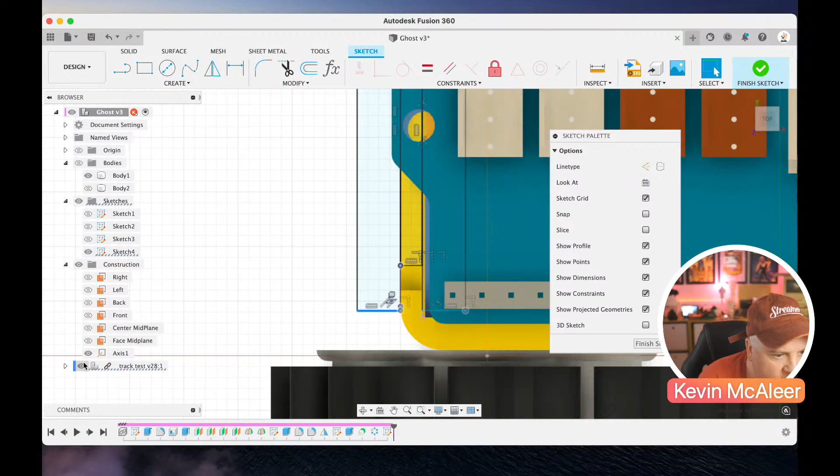D for dimension between that point. That needs to be 4 millimeters. I've done 3 up there, let's be consistent. 3. 34, 3. Okay, that is good.

And then what we also do, rather than just being a solid piece just in here, I like to make this another couple of rectangles. So rectangle just there, that is going to be about 4 again, I think. Yep. So that between there and there is 4 millimeters. Okay. And if we measure that, that should be 48.5. 48.5, perfect. Great stuff. Okay, that's the sketch.

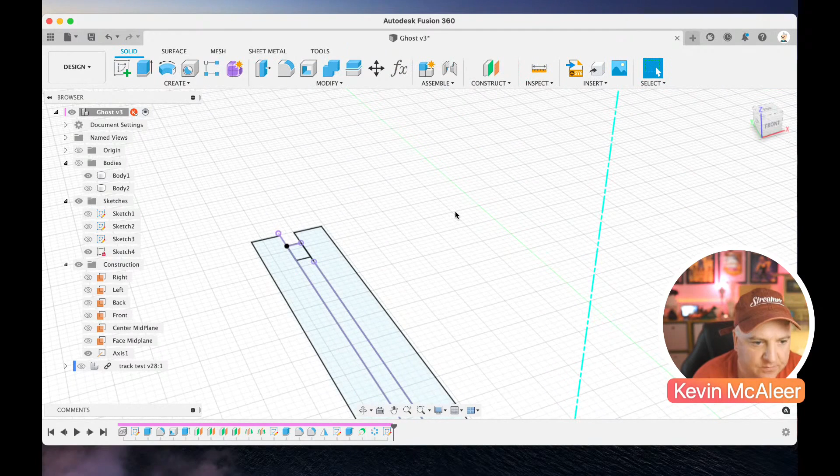So let's just finish that. We'll come back to that one in a minute, but that's what we need to connect. If I put our tracks back on, you can see what's going to happen there. We're going to create a little connector that goes between that and the ghost's body, which is there. Okay. Right, let's go back to our ghost and let's go back to the face. I'm just going to turn off that sketch and put the other one back on, which is our face. I'm just going to save this just in case anything happens.

There we go. Okay, and we're going to do similar to what we did before where we extruded into the body. We're going to do that again. So let's select. Now the reason that these eyes are different sizes is just to give it a bit of character. So let's just rotate this round a little bit. And I'm going to do Q for push-pull. So I'm going to select the small eye on that one and then the larger eye on there, and also that mouth. And I'm going to extrude it back by 30.

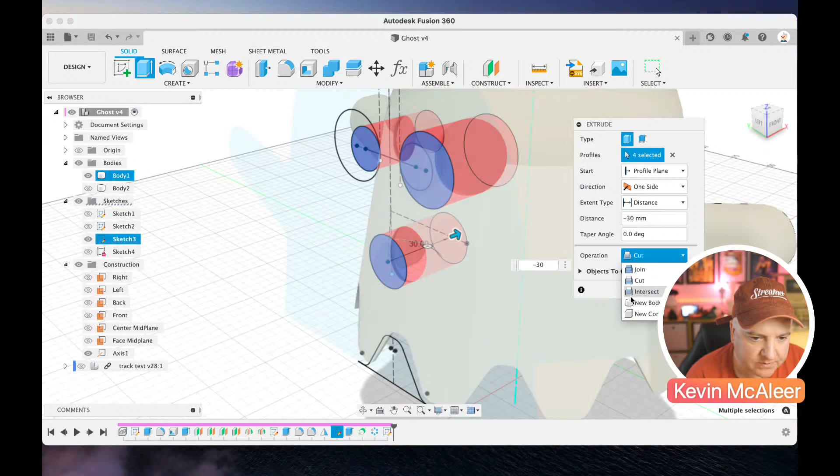Now instead of cutting it, I'm just going to create a new body. So new body and click OK. Like so. So let's just turn off those sketches a second so we can see what's going on. I'm also just going to throw in there an appearance. So where we had white plastic, let's just have some black matte plastic, and let's just throw that onto here and onto there and close that out.

And I'm just going to quickly name these bodies. So that main body, which is the first one, let's just call that ghost body. The second one we don't really need anymore. The third one is the left eye. That is the mouth. This makes this easy to navigate in a minute. And then the other one is the right eye. Cool.

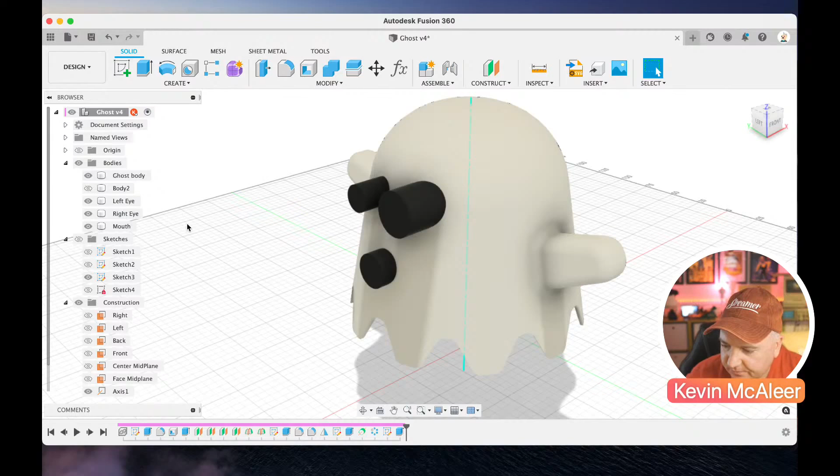Okay, we're going to leave them there for a second, and then we're going to go back to our other sketch, which is the connector one. We're going to hide the ghost body, and then we're going to extrude this up. So Q for push-pull. Let's select all the bits that we need. Let's get a better view of that. Okay, and we're going to extrude that up by 12. Do we need to have anything else selected? Let's turn off that, there we go.

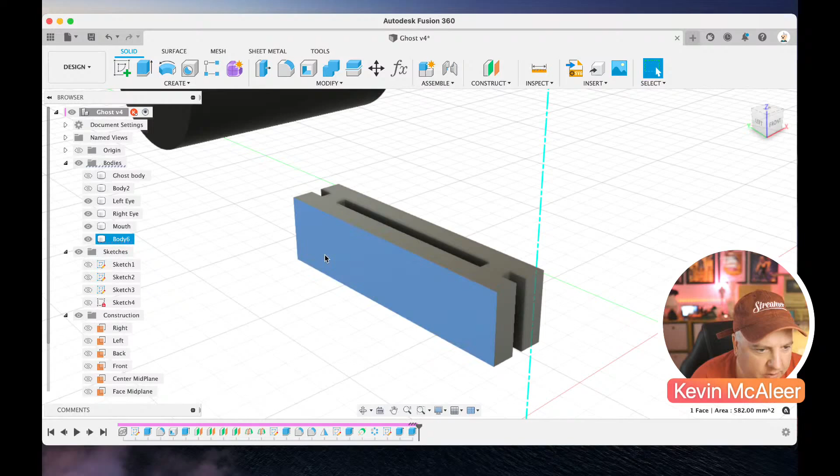And then we're going to click on that face there, and we're going to do Q to push-pull that face. It's an offset face, it's not quite the same as extruding out, but it's offsetting. We're going to offset that by 12, like so.

Okay, so now if we just look at our ghost body for a second, if you ever want to work within these and you want to make them transparent, you can actually right click and go to opacity controls and make them, say, 50% transparent, so you can actually see what you're doing within them. That's quite useful if you want to have everything at once.

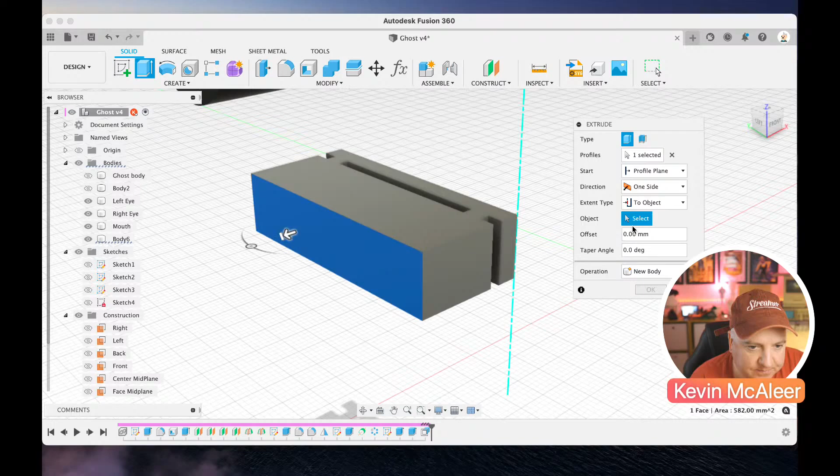Right, the other thing we're going to do, let's just switch our ghost body off for a second. We're going to click on that face there. We're going to do another extrude, so press Q again, sorry, E for extrude. And we're going to use some of these different options on here. So this time we're going to say the distance we want to be to object. And the object that we want is actually the inside of the ghost body. So if I just look underneath there, we actually want it to extrude to the inside face of that ghost body, like so.

And we've got the right option selected there, which is to selected face. And we want it to be a new body at the moment. Okay, great. So that's now perfectly touching that ghost. However, we've got this, oh, has it done that thing again? I'm going to have to just open and close it. I can just try and rotate it around to show you. At the moment, where the skirt is, it's kind of facing it, and that's not great. So what we will do is we will just edit that out by creating a new profile.

But before I do that, I'm just going to save the file, and then I'm just going to open and close it. Get rid of that weird pivot bug. Let's just go back into the data panel and open it back up again. Okay. So there we go.

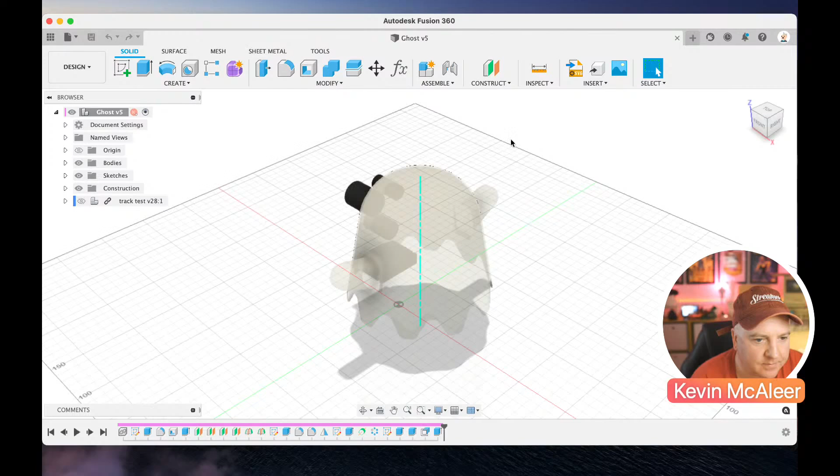So how are you finding this? Is it okay? We're going not too fast, not too slow.

You can see we've nearly got our ghost created. We just need to do a few more operations on the eyes and this piece just here. So what I'm going to do, I'm going to click on that face there. In fact, we could do this on the front face plane. So let's go to our construction lines, our front face, which is that one there. Let's just create a new sketch.

Carlos says very good. Good, good.

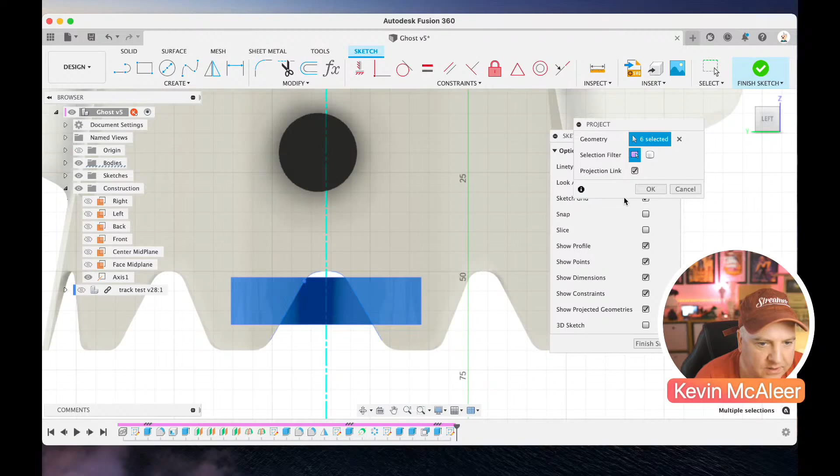We're going to click on there, and we're going to project in that outline shape there, so we can just click the bits that we need. It's really just that line there, isn't it? That shape. And yeah, there we go. Okay, so if we just hide the body for a second. Yeah, we've not quite got that line projected in. Okay. We can turn off the ghost body again. Let's have a look. Yeah, that's what we're after. So this profile here is what we need.

So I think we just need to reconstruct that by doing L for line and just sort of trace over the projected lines. Let's just create one between there and there. And we don't need to do those bits up there, but we do need to do just between there and there. And then the other cool thing is if you've already traced a line, so there's an arc that we need to create. Let's just do a 3-point arc, and we can just do the first point, the second point, and then if you just click on the line, it knows to trace that. So there we go. Okay, so we finished that sketch now.

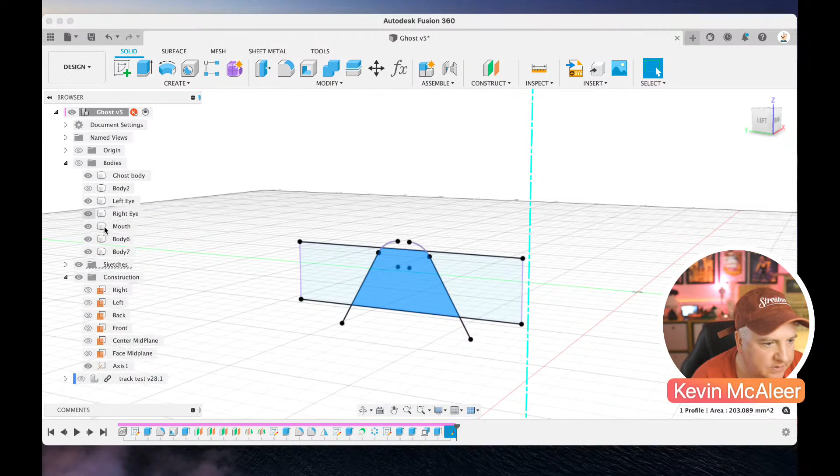We can now select that profile, which is what we want. And what we can now do is just cut that out of our connector. So if we go back to our bodies, these are the bodies that we've got here. We can actually join those two together, so let's just switch those two bodies on. Let's turn off everything else we don't need. So to combine things together, use this combine command. You literally just click one on the other, and that's it. So we've now got a new body, which we're just going to call connector.

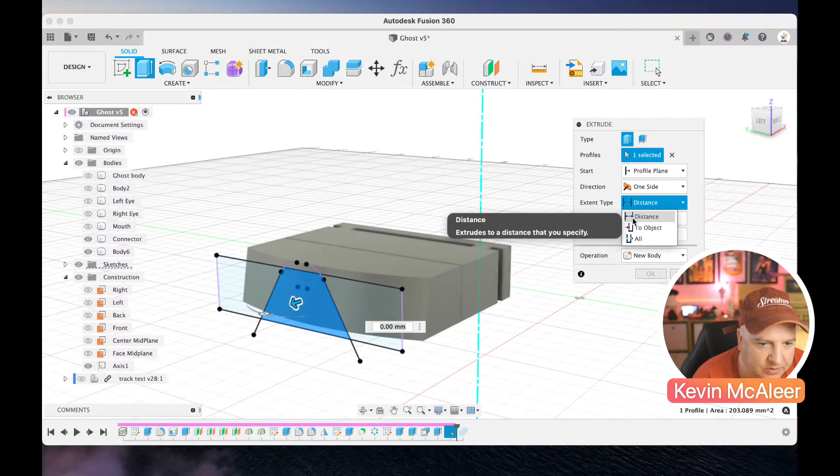Okay, and what we want to do now is just cut out that shape there out of this. So we just do Q for press pull. We're going to push this back, and in fact, the reason I hadn't joined that previously, I'm just going to undo that command. I'm just going to jump back here for a second while there's still two bodies, and I'm going to do that Q for press pull, and where we've got distance we can do to object, and we can just say do it to there. And let's just make sure that's enabled like so.

Okay, and now we can do that combine command. I actually just moved the timeline, so these two we can now just make sure we join everything together. So we want to join that to that and that. Okay, and let's just call that connector again. Okay, what else do we need to do now? So, just looking at my instructions, we need to do the eyes, I think, next.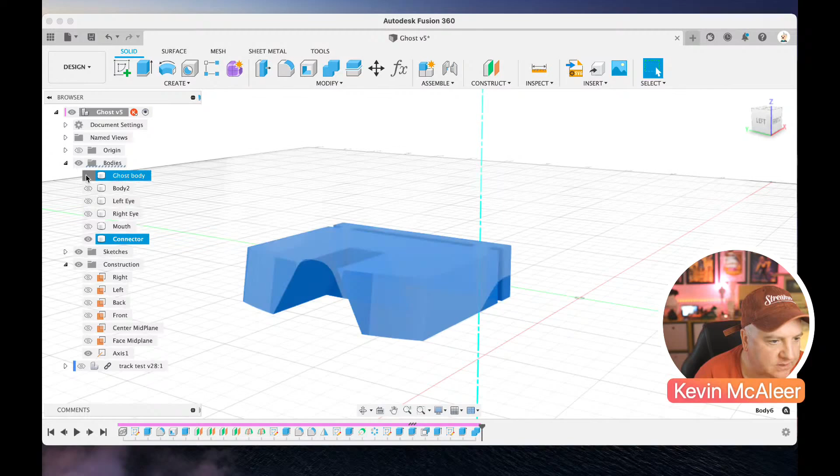We can actually now connect this to the body, so let's just do our ghost body. We can now do combine, select the ghost body, select our connector, and click OK. So they're now one solid piece, like so. And that means if we just switch our SMARS back on for a second, you can now see when it finally arrives that that's now able to sort of push into the top of our SMARS robot, like so. Okay, let's just switch that off. Let's just save that. Okay.

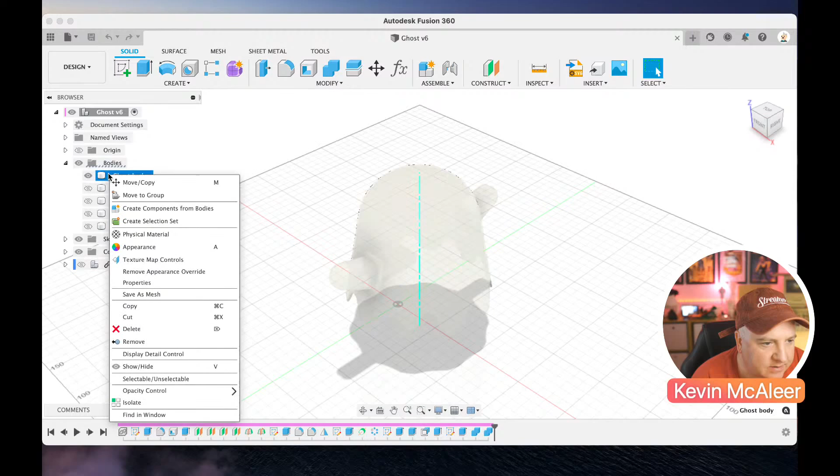Oh, it's got that bug again, so let's just close and open it one more time. There we go. And I'll just find the last command. So what we need to do next is the eyepiece and then just slice it. Very nearly done. Okay. I'm also just going to change the opacity back to 100% just on there, so it's nice and solid again.

And we need to switch on all the other bits. We don't need that body, but we do want our... Why is he blue? Oh, there we go. He was blue because he was selected. Right, so I want to do two operations with the eyes and the mouth.

First of all, I want to cut holes into the body, but before I do that, I actually want to basically have the body intersect with the eyes and keep that intersection, and then cut the intersections into the ghost body and then keep hold of them. And that will mean that they have that nice round shape of the body, but are the right shape for us. So let's do this one at a time.

We're going to use the combine tool. The target body is going to be the ghost, the tool is going to be the eye, and then instead of join we're going to use intersect, and that will create a new object which is the intersection of both. We do want to keep the tools because we don't want to lose our ghost body. Do we need a new component? No, we don't. Let's just do that.

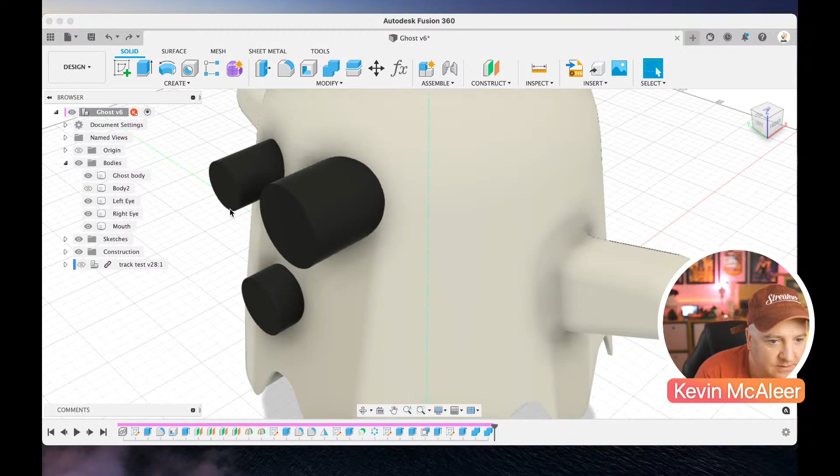Right, so we've now got two pieces, I think. So let's just move our right eye out of the way. You can now see we've got this. Oh no, it has done that incorrectly. Let me just backtrack a second. It's the right operation, but I removed the ghost body, which was wrong. Let's just do that again.

So combine. This time the target body is the eye, the tool is the ghost body, and we're going to keep the tool. That's correct. There we go. So I've now got this right eye. If I switch it off, we still have the ghost body there, and that's why you've got these weird sort of lines, because they both exist in the same plane.

We need to do the same now with the other eye and the mouth, so let's just do that. Combine the eye, the body is the tool, keep the tool. Do that with the mouth: combine, target body is the mouth, the tool is the body, keep the tool, okay. And then finally we want to do a combine again. This time we want to cut. So the target body is the ghost body, the tool is the eye, and we want to keep the tool.

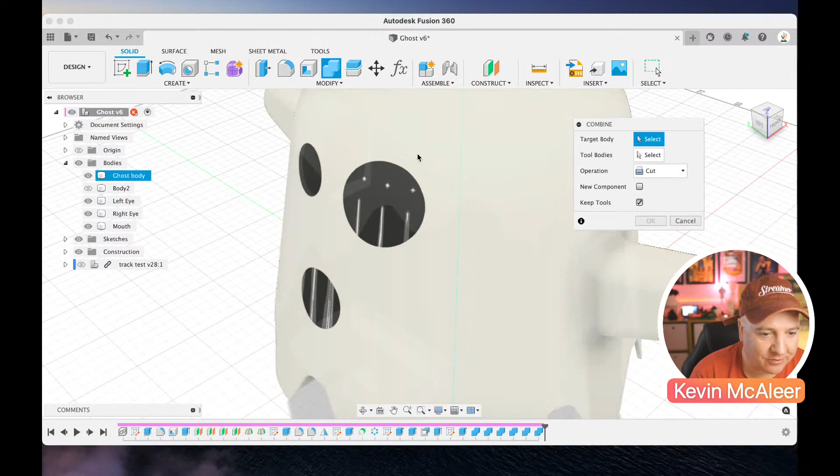So now what we've got is, if we look at the left eye, we have a hole where the eye is, or a solid hull, the eyepiece itself. So let's just do that with the other eye and the mouth. The target body is the ghost body. We have the eye as the tool. We want to keep the tool and cut it. And then finally, let's do that with the mouth as well. The body is the ghost body, the tool is the mouth. We want to keep the tool.

Okay. So now what we've got is a nice rounded, perfectly fitting piece, and we can 3D print these eyes and then push them into place and sort of glue them if we want to. On one version of this, I actually had a rangefinder in front of both of the eyes so that we could literally see what was in front of it and, you know, act accordingly.

So is that it? I think we're not far off if that isn't it. I think that might be the completed artifact. Let me see if there's anything else we need to do. Slicing it up. Okay, so we needed to do that before we do the slicing operation.

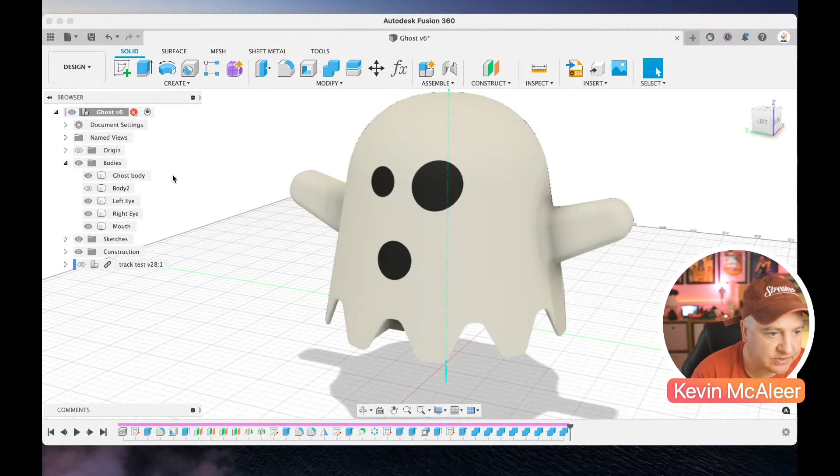So let's just turn on our very first sketch, which was that bottom plane, and we're going to use that plane there to create some offset planes. So let's just do that by choosing construct, offset plane. We're going to move this one up just underneath. Let's look at it straight on.

So I think this one needs to be about 40, basically just underneath where that mouth is. That'll do. The next one, we want another offset plane using that plane we just created. So construct offset plane. This one will be basically just under the eye. So let's do 35. Let's create another one. Use that one as the base for it, and we'll just do it above. So let's do that to 40. And that's great. So we've now got a number of planes.

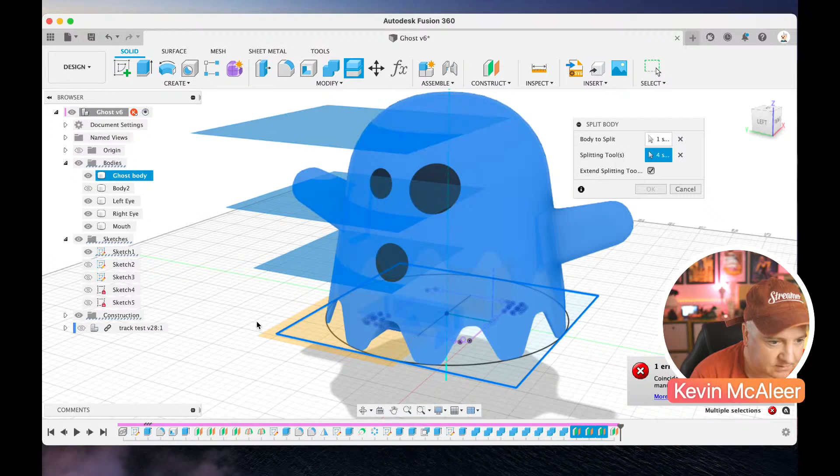In fact, let's just create another plane just on there, like so. And we can now use those planes to slice the ghost body. That means we can easily 3D print these into pieces that make sense to us. So if we now use the split tool, split body, we select the body, which is the ghost. The splitting tool is going to be that plane, and that. Doesn't need to be that one, sorry. There we go. So it's going to use those planes to slice the body into 4 different sections.

Let's just see where they've gone. Did that actually do it? I don't think that did it. Let's just try that again. So ghost body, slicing tool is going to be that, and that. Click OK. So it's saying there's an error. What's the error there? Compute failed. No intersection between target and splitting tool. That's weird.

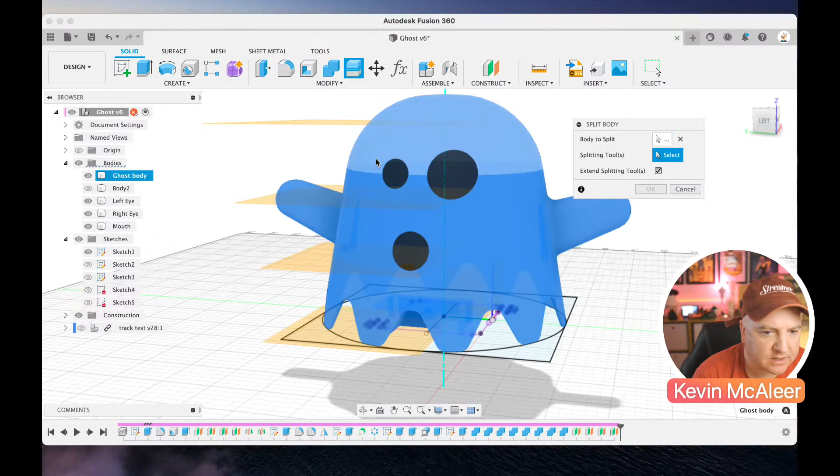Let me try that one more time. So the slice tool, the body. Let's just do one at a time then to see if that works. So select that plane there. Okay. Yep. So we've now got the sort of scalp. So let's call that a scalp. Why does that not look right? We're then going to do the same again. So we're going to slice the ghost body and then use that plane there. Okay. We'll call that new piece.

Oh, I didn't notice it cut his arm there. Let's just change the height of that one. So let's just edit that feature. Just move it up a tad, a little bit. Okay, let's just do that slice again. So the body, then that plane there. Okay. We'll call this piece here eyes.

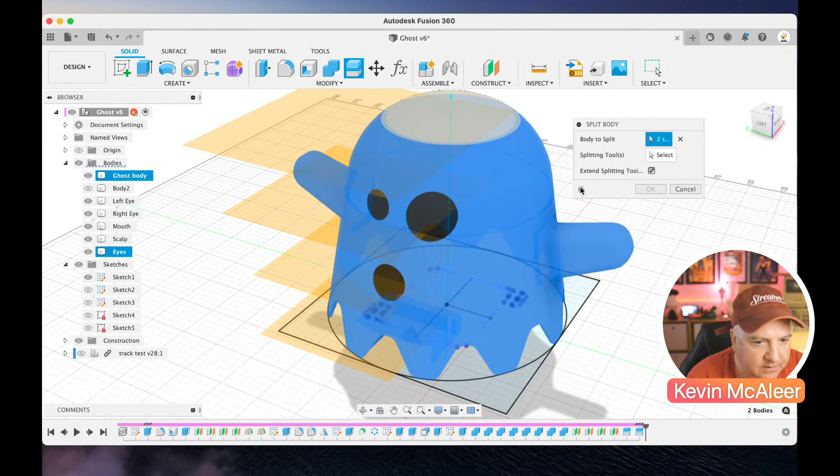Then we will do that again. Split body, ghost body. Select the splitting tool as that. Okay. We'll call this piece arms. And then that's it. We've got the pieces we need. So if we've got a piece here which is that weird block thing, if you right click that, you don't delete it, you remove it. If you delete it, it actually corrupts any operations that would use that further on. You can see there's this little remove command, and it means it's removed it from our list of things.

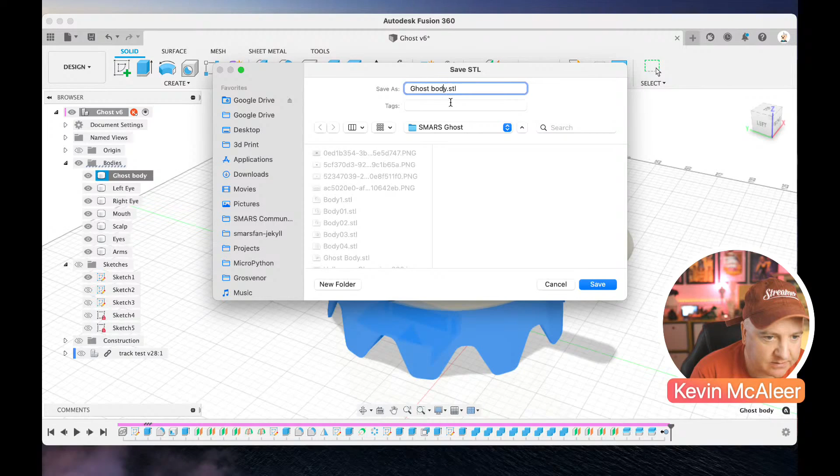Okay, we can hide now all the sketches and the construction lines, and what we can now do is start to save these out as a mesh. So up here it now defaults to this 3MF, but we can save it as an STL. So the options there: it's a binary STL, it's in millimeters, refinement is high, click OK. It's going to ask me where I want to save this, so this is the ghost body, let's call it skirt. Then let's click on the next piece, which is the arms, right click, save as mesh. It's remembered that it's an STL, let's click OK, let's call that arms.

Let's do the same now with the eyepiece, save as mesh, OK, eyes, and then scalp, save as mesh, OK, scalp. And we can also do the mouth as well, so save as mesh, OK, and it even remembers, look, it's got the name of the body, so that's really handy. And we just need to do the left and right eye, so save as mesh, OK. Job's a good one.

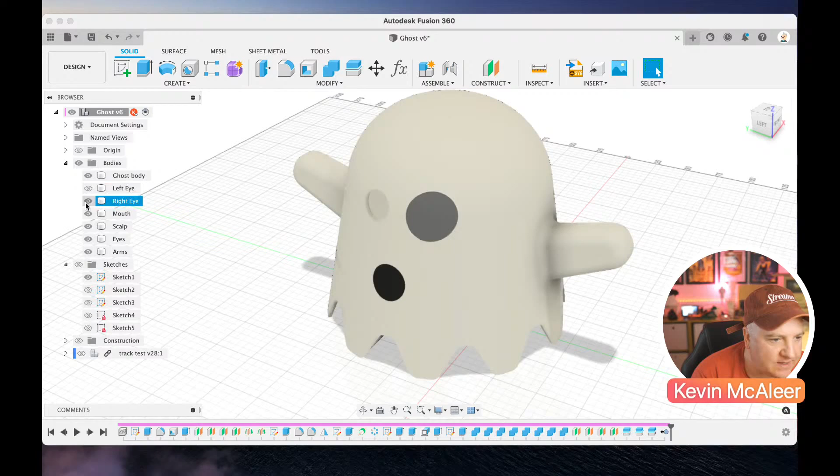We've designed a ghost. Now the really cool thing about this ghost, now that we've got these different bodies, we can just save that. We can now switch these bits off that we don't need to see. Let's get rid of the arms. And let's turn on our track test, which is our SMARS robot.

And we can now rotate this round, so you can now see how that connects together. I'll just zoom in there. You can now see that.

Pretty much what I have here is in place. Now all I've done on my version, this is the Pac-Man version, I've created a hole there for the line sensor module. I've also just used a rib command to create these little ribs to give that a bit of extra strength. But that pushes into the SMARS. The SMARS is a little bit wonky, you can see the wheels need adjustment there, they're sort of bending out a little bit. But this was just a test one I have. Yeah, it fits in place, it holds it, we have a base there to go from.

So we can now take those STL files, put them into something like Cura, and start printing. That's what I'm doing with these pieces I've got here. On this Pac-Man one, once I've removed the filament and glued these bits in place, we'll have a nice round, and I've removed all the filler stuff. I'm going to glue them in place. I could have created an extruded bit that clicks into place, but I haven't done that. I assumed I'll be gluing this in place.

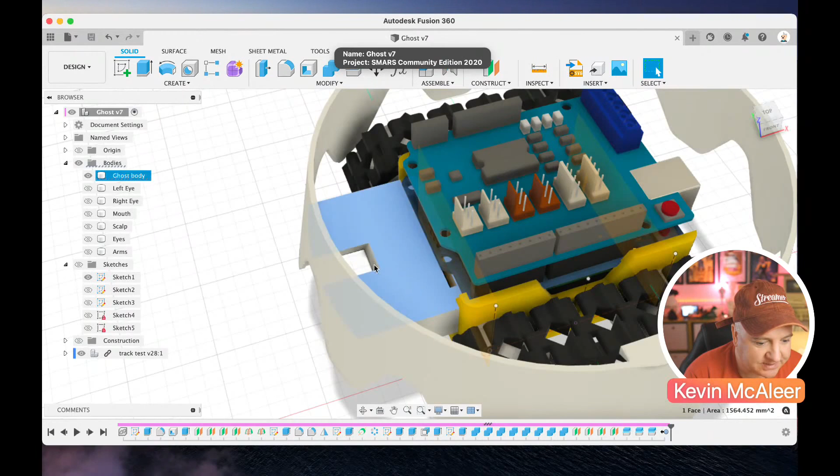To GrabCAD. So if I go back over to Fusion for a second, if I wanted to save out this ghost thing, I can right-click, export - I think it's the whole thing you actually export. There we go, export, and there's an option to export it to, let's go back in there... I can't find where that's gone now. Sure it was export. There, was actually under file, that's where it is. File, share - not export, share to GrabCAD, and that's what I did with that other part.

In fact, it's probably under my saved items. So if I go and find, there you go, HW-201. So there you go, painstakingly drew that out, maybe a bit obsessively, but that meant I could put that in my model and make sure everything fits. And as you can see, it does fit. Nothing quite like having digital calipers. So yes, if I've not got the part, I will go to GrabCAD, that usually is a good source of CAD stuff.

And Dale says, even with limitations, it's still worth using Fusion 360. I love the fact it does parametric modelling, so you can put all the measurements in. You can constrain things and build your model. It's just a really good way of working.

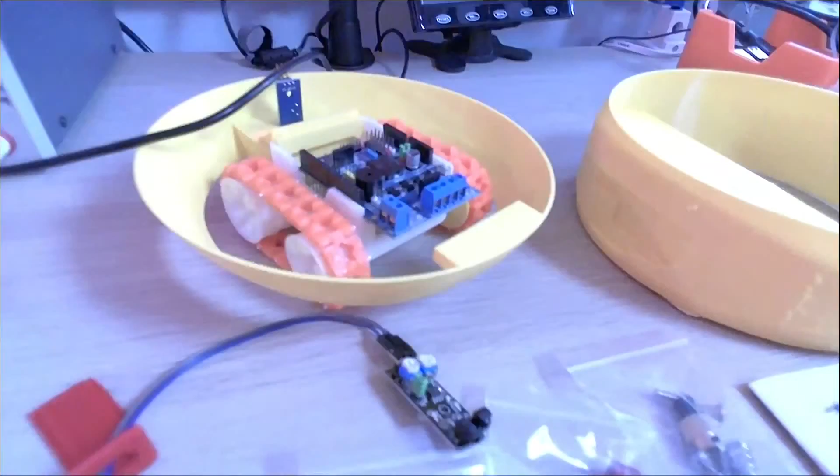Carlos says thank you Kevin, thank you Carlos for watching and joining me with this today. So I'm going to try down-scaled robots to fit on my printer. Yes, absolutely, or think about how you could jigsaw it back together, maybe not just glue.

Super glue works perfect on PLA, I found. Other people use a 3D pen to sort of weld together other pieces. I've seen that certainly happen.

And Hypotic says, do you think SMARS could be scaled down even more? You know, I think you could. So with this SMARS Mini, this has currently got 2 motors in it - one motor that way and one motor there. I think you could probably get away with a smaller motor. And in fact, I have a box full of motors somewhere. Where is it?

Is it this one? Yes. So this little bag I've got here has some ridiculously small motors in it. I don't know if you can see how small they are. They're actually stepper motors. You could build some out of that and make a really, really small robot.